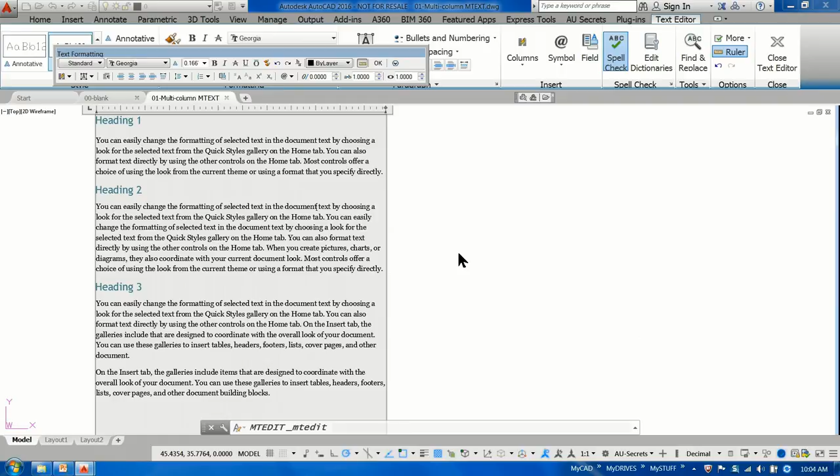So we're going to right-click and go to columns, and we all know we have columns. If you use the dynamic columns and the auto height, I want to go ahead and show you a couple things that you can control. So first of all, if you look at this, double-click, there's a little icon right down here that you can use to separate that. Did I not turn that on?

Columns, dynamic, auto height, there we go. It's not set to 2, obviously. Come on, don't you love it when the first tip doesn't work right? That really is no good. There's another setting, that should have worked.

There we go. Okay. Don't know why it didn't work the first time. But when you go ahead and you move this around, by default you don't have any control initially over what the spacing is between the columns. But how you control that is if you just use the arrow over here to control your paragraph width, that's how you can change what the spacing is between the column. And then when you wrap it, it will maintain the distance that you specified.

All right? So you have to use this little button right here. Everybody tries to always use this one. That doesn't really work for what you want. All right. Not major, but if you've not run into it.

Okay. Text frames. Now this one is actually a new tip in 2016. How many of you are in 2016? Oh, that's impressive. Okay. So in 2016, you have a new frame that you can put around your text. So if I select this piece of text and I go to Properties, you will see that right here you have a text frame option in your Properties now where you can turn it on.

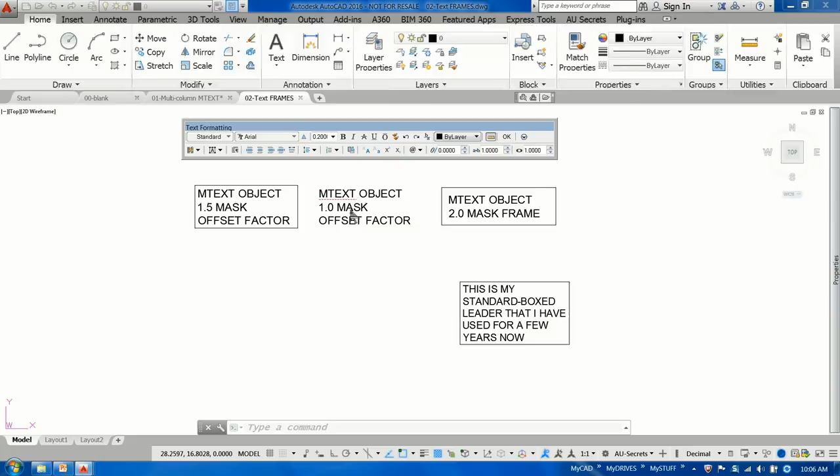And the secret is how do you control the spacing between the text and the frame? Well, if you go ahead and edit this and you right-click and go to Background Mask, even though I'm not using the mask, this is your spacing. So if I change that to a 1, oops, not 10, 1, and then I won't actually use it, I'll turn it off, that still is what it actually uses. So here you can see some of the examples that I did where I've got 1.5 and 2.

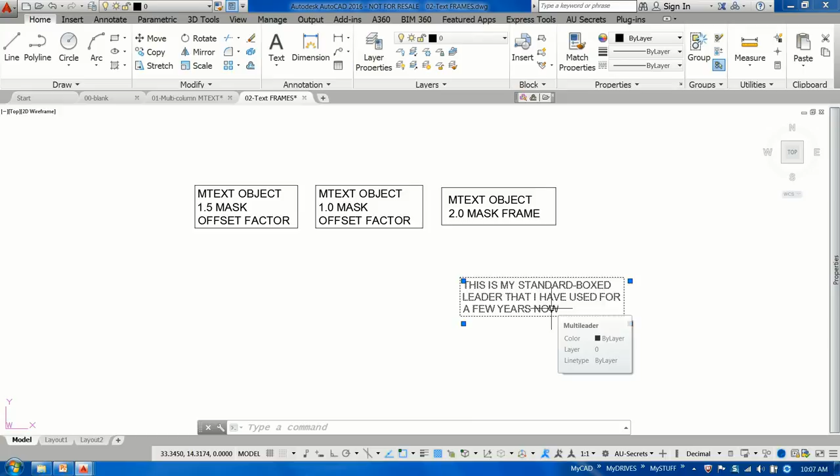Now, if you're not in 2016 and you're in any of the previous versions, I want to show you my tip that I used to use for box text that was dynamic so that when you modify it, it grows and shrinks with you. This is actually a leader. So what you need to do is you need to make a leader type with no leader. That's the trick. You have to figure out how to misuse and abuse AutoCAD, right?

So if you look at this, I'll go ahead and show you what my leader style looks like. You come up here. I have a standard boxed leader. And yes, it should be annotative, by the way. If you come in here, I don't have anything turned on here. There's no leader points. But one of the things that you do need to do is you need to come in and specify your arrowhead size.

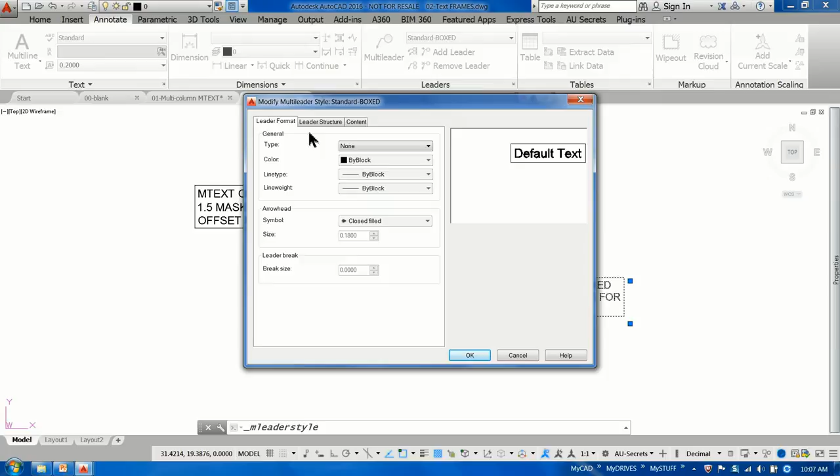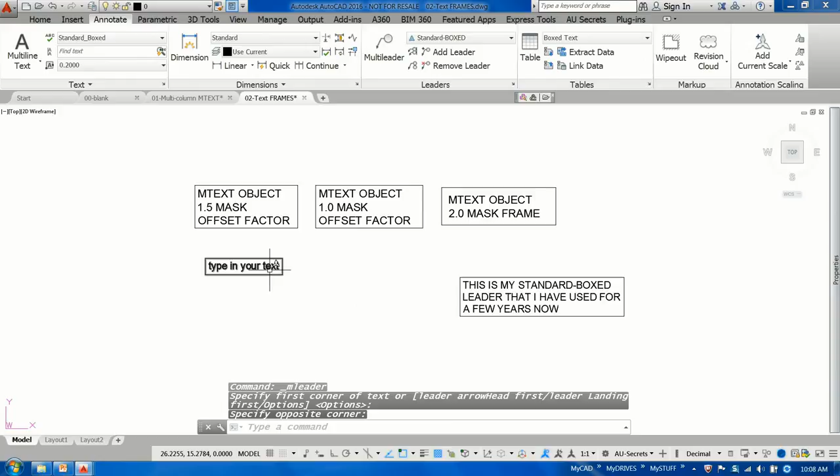And the reason you have to do this, I'll show you in a minute, you also need to be able to specify your landing distance and a couple of those other settings because they control things that you'll do with it later and some of the spacing. And yes, it should be annotative. So then if that's my current text size, when I use my leader command, it actually lets me draw the box with no leader, and you just type in your text, and it automatically has a box around it. And if you want to modify it, it'll adjust accordingly.

Now, the reason I like to have those other settings defined is it can be kind of nice to select it and right-click and add a leader down the road if I need to. So it's nice if those settings are actually defined, if you ever need to. But you don't have to have a leader defined on a leader. Just use the text settings. Okay. And all the instructions on how to do that are all in the handout.

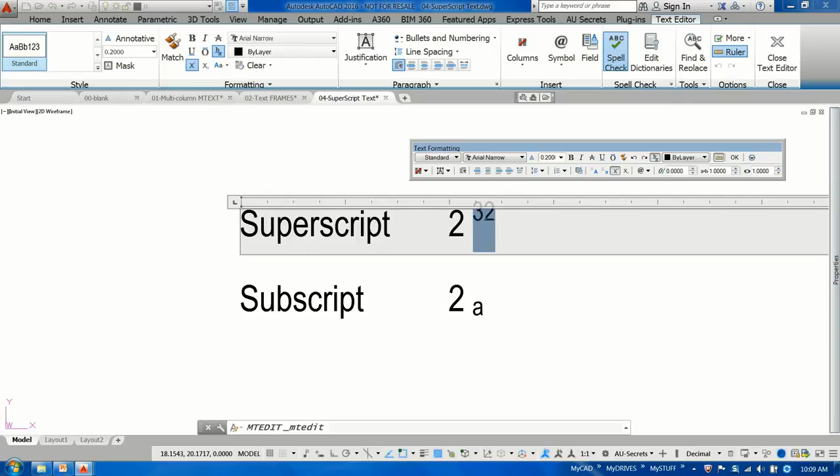Okay, superscript. Everybody knows how to do the typical superscript, right? Because now it's in the mText editor. Is everybody using mText now more than dtext? That didn't sound very good. Okay, because mText is actually pretty functional now. If you double-click on this, everybody I hope knows that you can just highlight this and you can hit superscript or subscript, right? I think that part's obvious.

What's not necessarily obvious is how you can do some of this other subscripting and superscript. So here, this is how, and you could do these for years. This has been there for years. You just had to know the trick. If you take text that looks like this, top/bottom, and you double-click that, and you make that into a fraction, what the slash will do, so I'm going to come up here and I'm going to stack the fraction, is it'll actually give you text in the fraction.

So I used to work with utilities. We had a lot of text that were fractions, not numbers that were fractions. You can also do this one. If you do the same thing and you stack it, it'll give you the diagonal fraction with text. And then these here, if you select this, these are more like the old way of doing the superscript and subscript.

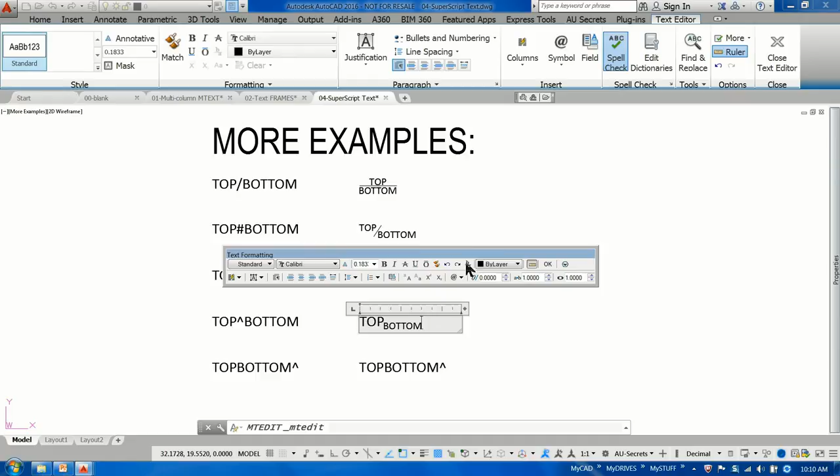That one will allow you to, with the up caret there, just make it a stacked fraction with no line. And then right here, again, I would do this one different. You could highlight just that portion and stack it, and that would give you the subscript. But these two down here are actually easier just to use the buttons that are up here at the top. Make sense? All right, these three here are the ones that most people don't know they can do.

Okay, I haven't hit one yet, huh? You guys all knew all this.

Okay, clearing attributes. Now, I don't usually include a Lisp routine in my secrets, but I loved this one so much that I thought I have to make sure everybody knows about it. In the handout, we'll tell you the website where you can go download it. It's free. Or email me. I'll send it to you because it's free.

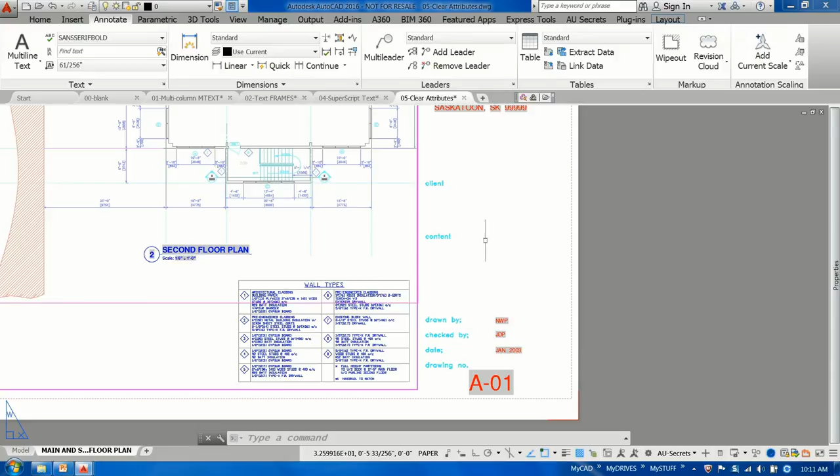Yep, I've been using that one, and I thought, okay, I got to make sure everybody knows about that. I hadn't done this one for a while, and I thought, oh, I got to put that one out there. So that one's free, so download it. That's the only one I have in the secrets that you have to actually go get something to get it to work. But free is always good.

Okay, this one I did repeat from last year because I keep getting requests on how to make this. This is actually a block that has a field that will read the insertion point of the block. So if I go ahead and I add this one, I'll select it and put add selected. You can see what the block looks like by default. If I come over here and I snap to something, and I'll just go enter, enter, enter. Oops, I didn't really want that to be at an angle, but all right, see it picks up the insertion point, and my insertion point is at the little dot on the end of the leader, okay?

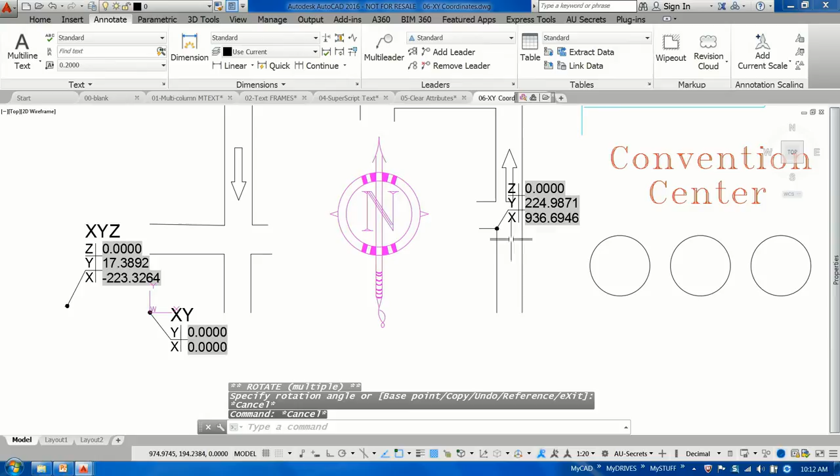If I take this and I move it, or let's just copy it. Oops, I hit the button too quick. Copy, come on, copy. Oh, I went past it, sorry. Better read, huh? Copy. Sometimes you can't click. There we go. Copy.

And you see I made one for XY as well. Now, it doesn't look like it necessarily worked, but if I regen, they'll all update with their insertion points. So I have any civil people out there? It's a great way to label your points that you need to label. All right? Now, how did I make that?

If we edit that block, and we come in here and we look at, let's just look at X. All right, it's a field. It's the insertion point field. And if I select that and I go to edit field, you'll see that I did an object and I selected my object, which was my piece of my field. It's a block placeholder, which means it's going to look at something about the block when the block is inserted. I looked for the position.

I specified how I wanted the units to be displayed. And then I selected that I wanted that one to be the X value. And I did the exact same thing for the X, the Y, and the Z. All right? And then you pick OK, OK, and that's basically what you have in your block. And then this here is just actually a piece of text to label it. So these three right here are the X, Y, and Z fields. All right?

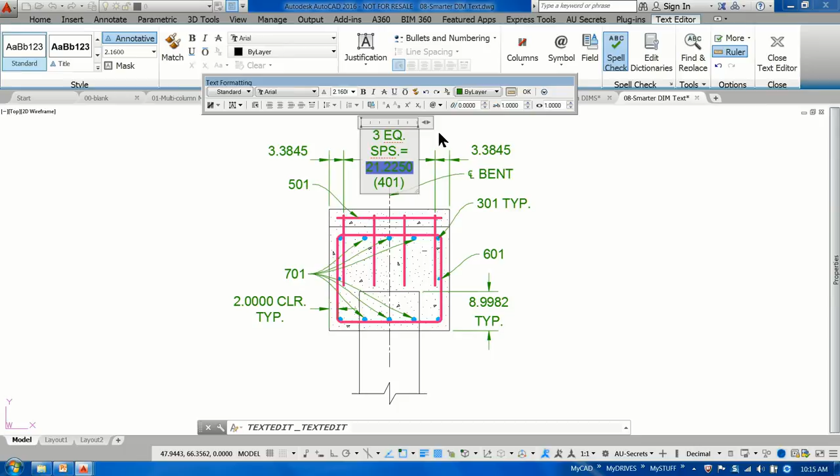Yay! Did you not want that? I've been waiting for this one for a long time. And you can add whatever text you need, right? I thought that was a huge improvement.

Okay, there's a new dimension command. I don't know if you're in 2016, you've already found it, you've already been using it, and it's your favorite, right? How many of you still type in dim from the old days to get the old dimension command? Well, that one's gone now, and now you're going to get this one, all right? So the key in for this is dim. So they're going to force you into the new world, all right?

But the new dimension command actually looks at what you hover on. So if I hover on a circle, it's going to give me a diameter. If I hover on a line, it will give me linear. So a parallel line will give me, if I can get that to hover, I didn't mean to catch that. See, there's that one. I get an aligned if it's an angled line. If it's a straight line, you're going to get the straight line. And whichever one you pick, when you finally select it, that's where you drag your dimension out. All right? Now, there's a couple of other really neat things that you can do with this.

If you're using this new command, and let's say I want to split this 2.0 dimension into 2. If I hover here and I select this, when I come up here and I select on this dimension, come on. Oh, I must have fat fingered it. Come on, find it. Why aren't you giving me the break? Yeah, but I don't want to use it. Oh, you know why? Because I don't have my dynamic input turned on. Who uses dynamic input? Yeah. This one is easier to see if you use this.

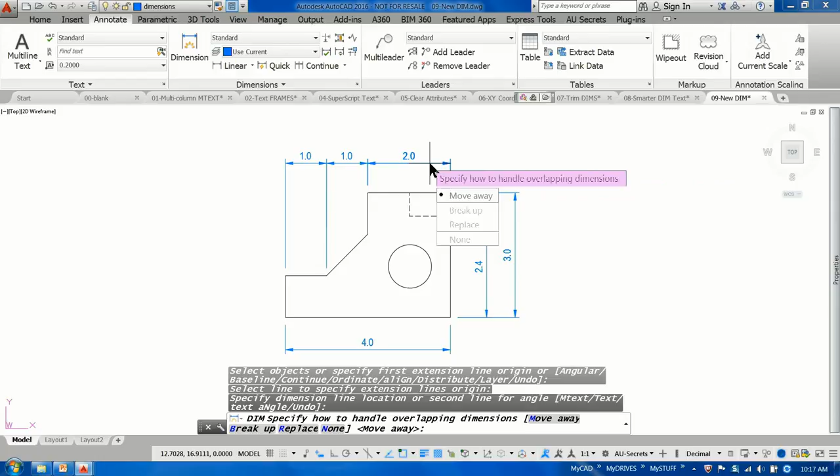So I select it and I come up, and now I select this, and there's a new break up option. If I do the break up and I select this dimension, it'll actually break this dimension. It's supposed to break up, there we go. And it'll break it into 2. Isn't that a great option? So now you don't have to trim and then dimension, right? So that saved me a couple steps.

And if you're doing the dimension command and you're on a circle and you select that, you'll see you have an option to change to radius right at that point. So you don't really have to even have those other commands. So now the only command you really need to use is dim, unless you're dimensioning between things.

Yes? Okay, so I've got a property line that's an arc, and all I wanted to do is dimension the overall property. I'm just getting used to this. Is there a way, I mean, it's selecting an arc, right? Because that's what it is, but I don't want it to be an angle or an arc or anything like that. I just want a straight dimension. You want the length of the arc. I want the length from this point to this point, but that line happens to be an arc. Right. Send me an email.

The question was, how do you dimension the length of an arc? And in AutoCAD, it's not a simple process, right? Any other civil people out there? So I would be happy to show you the steps you have to go through to do that, but I have to set up a specific dimension style in order to do that. So send me an email after the fact, and if anybody else wants that too, I can send you the step-by-steps, show you what you need to set up, because you have to set up a specific style to get that to work. Okay? Okay.

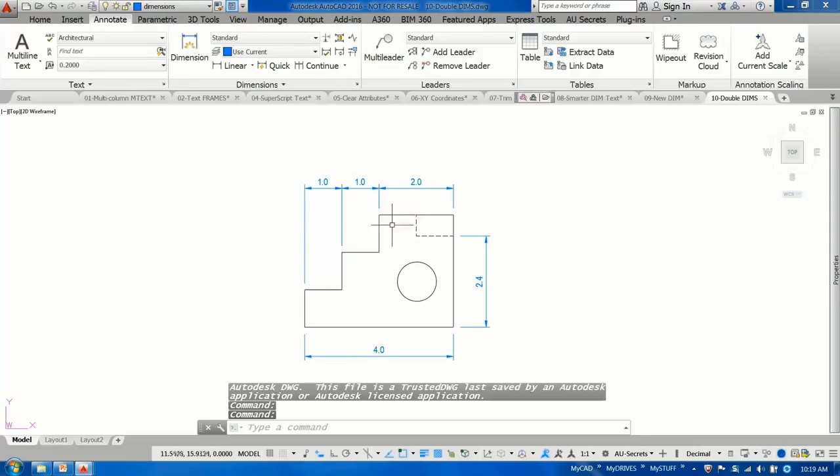All right. This is another oldie, but I want to make sure everybody knows about it. You edit your text, and you want this to be a typical dimension, right? And you don't want it to stay up on that line. You want it to go down below. Am I in the right file here? Let's see.

Yes, I am. Okay. Because I have a style in here that I want to use. How do I get TYP to go below the line? Because if I hit enter, it does that, right? Somebody knew it. What do? Backslash capital X. Right? And that will actually send it below the line.

Now, if you do this a lot, well, I'm not saying you should do this a lot, but what if you have a not to scale dimension because you're in a hurry, right? But then you always go back and fix it? Yeah, right. I know you don't.

If I have a dimension that I want to do this on, what I do is I create a style so the users can do this easily. You select the dimension, right-click, and if you go to Style, you can have a typical dimension or a not-to-scale dimension. And it'll automatically put it on there for you. All right? So it's important that you make life easier because otherwise your users don't do what they're supposed to do, right?

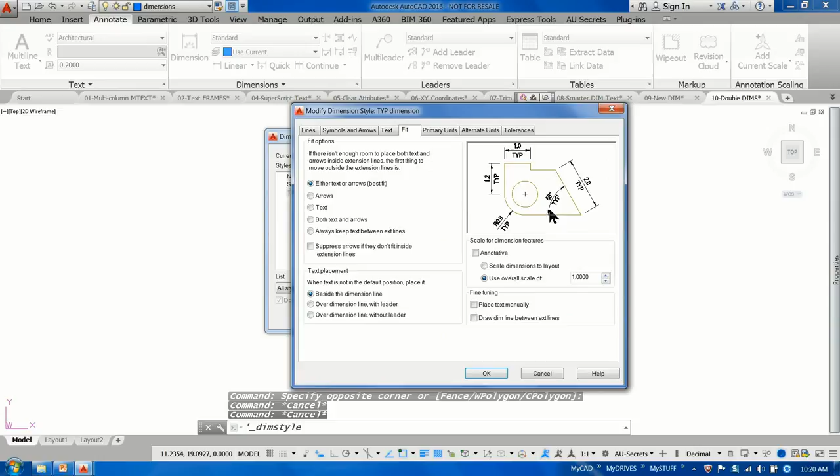So how I did that is if you look at the dimension styles for typical, all I did was underneath of, there it is, as a suffix or a prefix, whichever one you want it to use, I put the \X with the TYP. And then that will force that to be below any true number that is in my dimension. All right?

Now, if you edit your dimension so that it's no longer true, first of all, I'll slap your hand, right? Now, how do you restore it? Excellent. You come in here, highlight that number, and you do less than and greater than. Now, I've had trouble with this before.

I end up now in 16, I have to come over here and do it in my override right here. I'm going to have to report that one because I don't like that, right? I don't like having to do it from properties. Something about the MText editor is not letting me put that back in. Okay. We already talked about split dimensions.

Okay, quick edit MLeaders. Everybody knows that if you select a multileader, you can remove the leader, right? All right, that's a given. I'm assuming that's not a secret. Now, the secret is, how can I quickly come in and just delete one line without using remove leader? Because this way is quicker. Who was in my Jeopardy class? What's your favorite key in AutoCAD?

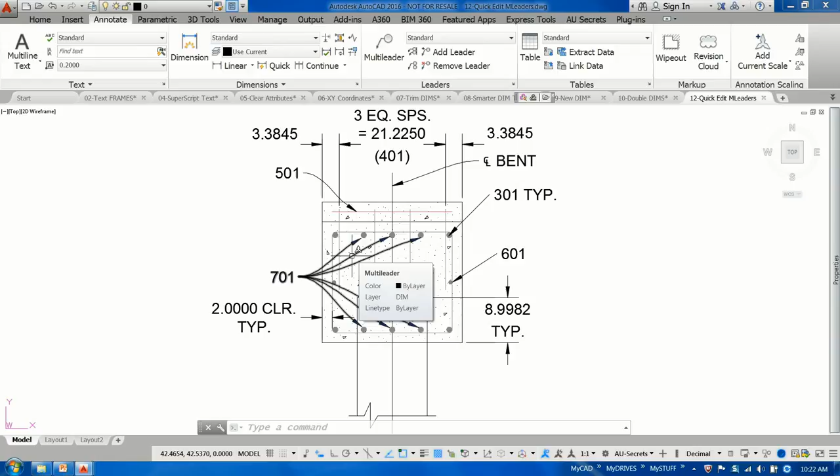Control. So did you know that if you hold the control key down and you select the leader line, you can just hit delete? Isn't that nice? And another thing you can do, once you find that out, you start trying things out. Well, what if I zoom in here and I use the control key and I pick just the arrowhead? What could I do with that?

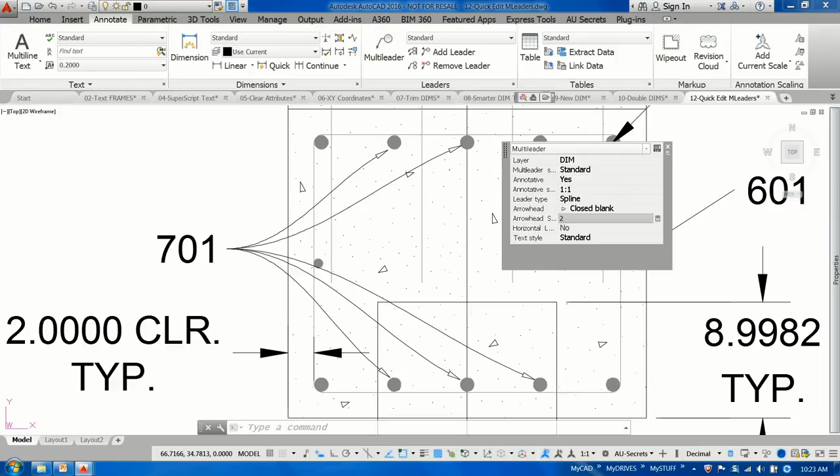So if I want to change the arrowhead, I'm going to turn on quick properties. And let's change it to open, closed blank. They're all changing. I can change the size. Oops. Isn't that cool? No? I thought it was cool. So I'm sorry. Okay, maybe I'm weird, but I thought that was cool.

You can also come in, select the line, and using quick properties, you can change it from one type to another. None. And now that does not look like a spline. So I'm not sure what's happening with that spline, but I may have to modify this a little bit. That is not a spline. Let's try this one. I'll do it over here. There we go. Now let's change that to a spline. There. That's how it's supposed to work. I'm not sure why that one's not working.

All right? So you can change any part of the multileader. So now you can have a multileader with some straight lines and some spline lines. Because you can't define it that way as a style, can you? Nope. All right.

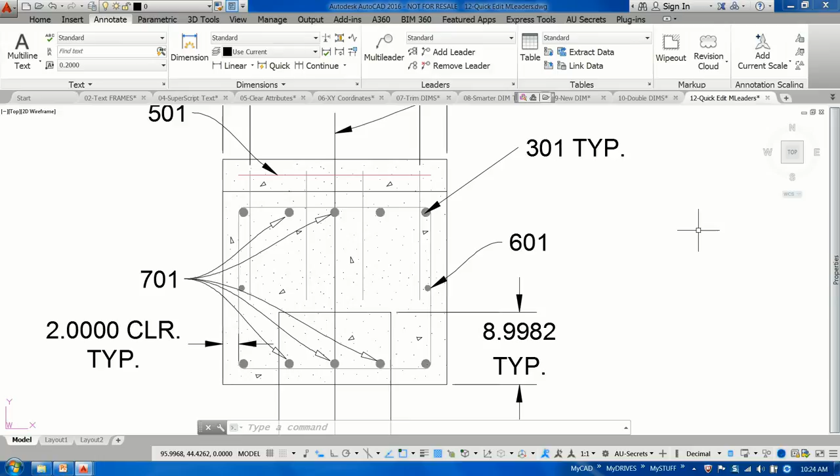Okay, the forgotten dimension command. Everybody knows that if you do DIMALIGNED, and I would snap here and here, I'm going to get a crooked dimension. Because DIMALIGNED aligns to your snap points. That's not what I want to do. So there is a key-in only command called DIMROTATED. The only way you can find it is if you key it in.

So if I type in DIMROTATED, all right, specify the angle of the dimension line. Let's just angle it with that. Now if I snap to those points, it stays parallel.

Now you're a good draftsman, right? Well, we got these rules that you still have to follow. Some of you are old enough to have done drafting by hand, right? Remember those old days when we used those archaic things like pencils and pens? All right. I had a student once go, draw by hand? What do you mean draw by hand?

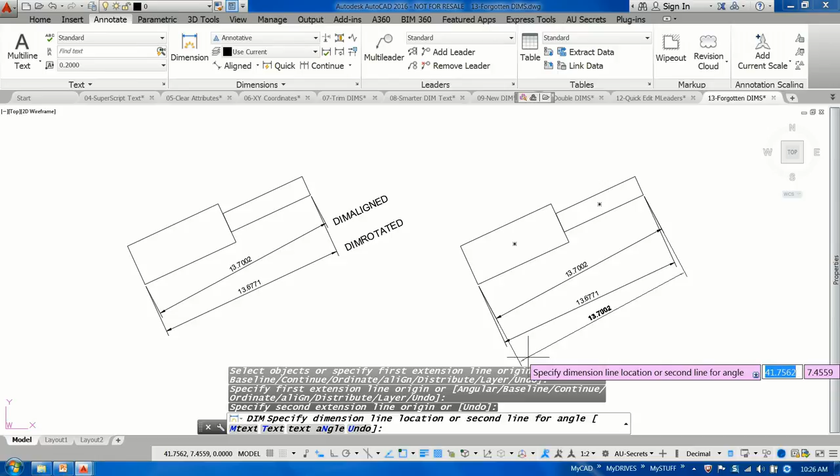The new one? This one? All right. You get a prize if this works, because that's a tip I didn't know. So you go from here to here. Oh, see the angle you mean? Keep going to where? I'm trying. That's okay. You almost got a prize.

That would be cool if I could hover here, though, and it would align, right? Now, I did notice there is an angle, but that's a text angle, so I don't think I can do that. But that's a good idea. Go to the AUGI website and do a wish list, because I think that's a great idea.

I'll give you a small prize if you come up. All right. Yes, anybody who gives me tips that I don't know, because I can't find all these. You guys have to help me.

Okay. Now, I already did number 14. How would you reset all of your dimensions to be true? If somebody's overwritten them, you do the less than greater than, right? So how would you do that globally? Just select all your dimensions and use properties, right? Okay.

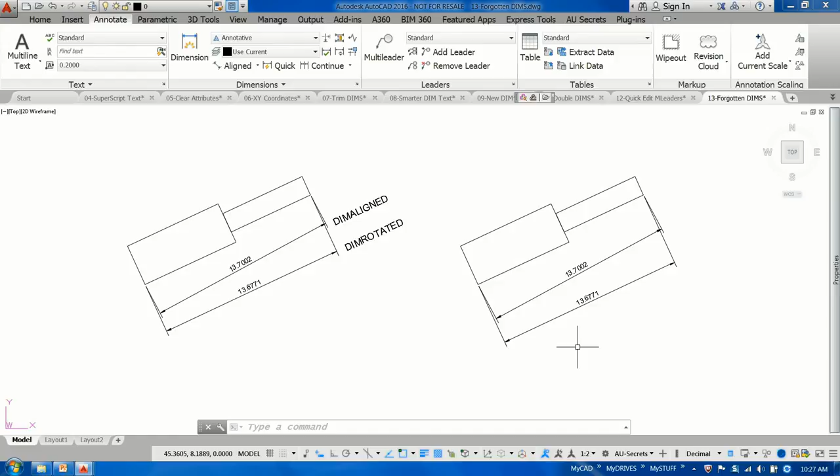Okay. Here I just have my regular dimensions from a drawing that I did years and years ago. How many of you are using parametric? Really? None of you? All right, there's one. Yay! Star pupils. Okay. If you've got an old drawing and you want to now make it parametric, but it's already got the dimensions on it, there is a button right here that allows you to convert the old dimensions to a parametric dimension.

Now, it doesn't initially look like it's going to do what you want because it does that, all right? The reason it does that is because D1 is the parameter name, right? If you look at this variable right here, constraint name format, what you need to do is change this variable so that it doesn't give you the expression, but it gives you the value, all right? So if I come in here, and I select this, and I go to Properties.

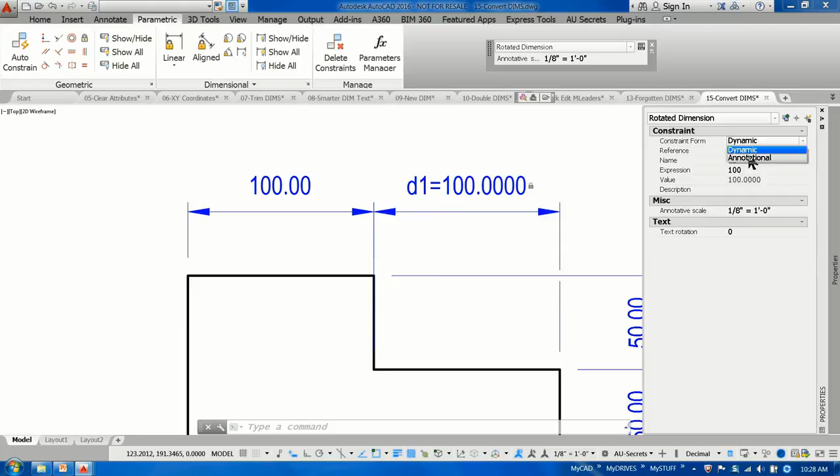It's annotational, all right? It does have to be annotational as well, just so you know, but I think they all come up that way now by default. Prior to 2015, 2016, I used to always have to come in here and change this to annotational, because it would turn into like a grayish. It'll look like this initially. So be sure you come in here and change this to annotational. And then, if you type in that constraint name format, and I change it to a 1, then it'll actually look like a real dimension when it prints, but it's still parametric. All right?

All right, this one there's a couple answers for. Depends on what version you're in. How do I get my dimensions to size themselves in my viewports? What's the best answer? Annotation scale, right? How many of you are using annotation scale? That's getting better. It's getting better. Most people are still not liking it, but it's a learning curve.

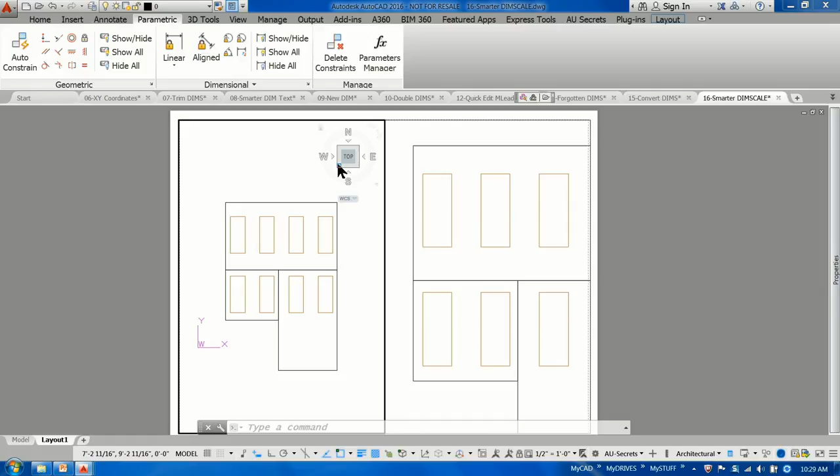Try again. If you don't use annotational dimensions, then what you want to do is set your dim scale to 0. If you set your dim scale to 0 and you dimension in your viewport, AutoCAD will automatically size your dimensions anyway. Okay? Trust me, it works.

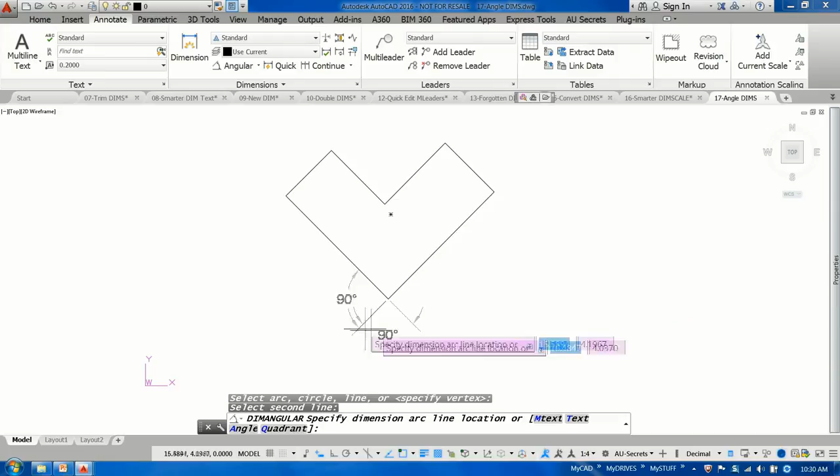Okay. I keep getting this question, so I added it. Sometimes, you think people know things, and you find out that they don't. Here, I want to do an angular dimension. And if I select my 2 lines, I get everything less than 180, right? How do you get more than 180? I get this question at least 2 or 3 times a year.

You run the command differently, all right? If you look, it asks you, you can hit enter to specify the vertex. You know, read that thing called your command line, right? If I hit enter, I can now specify the vertex here, and I can go to here and here, and I can get any angle that I want. See, it's hidden. People don't even know that. So good. There were a few of you that hadn't discovered that.

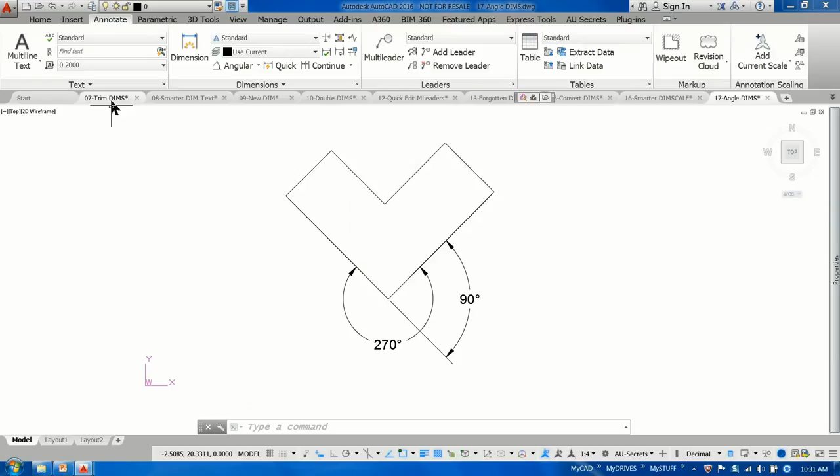All right. Oops, not Control P. You know what? I better close some of these, so I'm going to right-click. Here's another good one. I'll do right-click up here. Close all other drawings, and we'll just say no. I wish there was a close all and don't make me say no. There we go. All right. Not that it would crash on me, but.

Okay, I have a polyline. How do I get rid of that middle segment without exploding?

All right, if I hold the Control key down, our favorite key in AutoCAD, and select this, it selects it as a subobject. This command was initially intended for 3D, so you could select subobjects in 3D, but nobody said it wouldn't work in 2D. So if you select this, and let me turn off my quick properties here, and you just hit the delete key.

How many of you would still be exploding, right? And here's the cool part: these stay as polylines. It's even better. Explode is not the answer for everything. It should not be your first solution. It doesn't work, explode it, right?

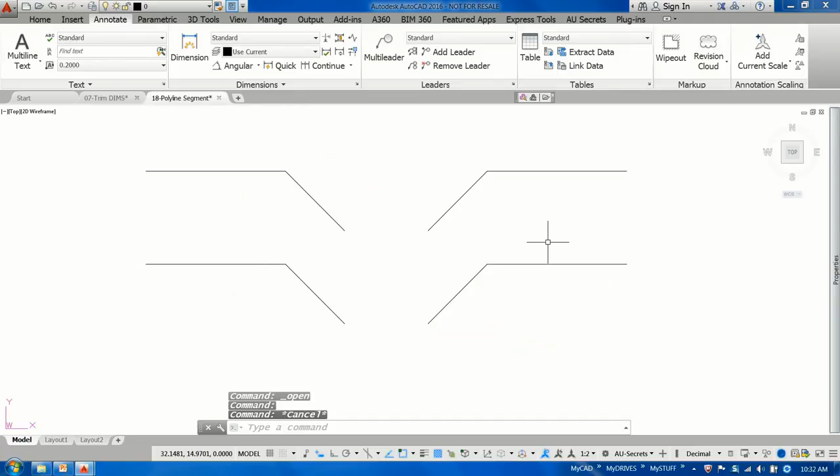You could select multiple. Yeah, they're two separate ones. If I Control-Delete, this is a polyline and that's a polyline. They're not connected, but they stayed as polylines, whereas had you exploded it, they would all be lines, because then you'd have exploded it to individual lines and deleted one of the lines.

All right, the offset command. I'll confess, the reason I looked for this one and figured it out, and was so happy when they finally did it, was because I also teach MicroStation. This was one of our missing commands in AutoCAD that we needed for a long time.

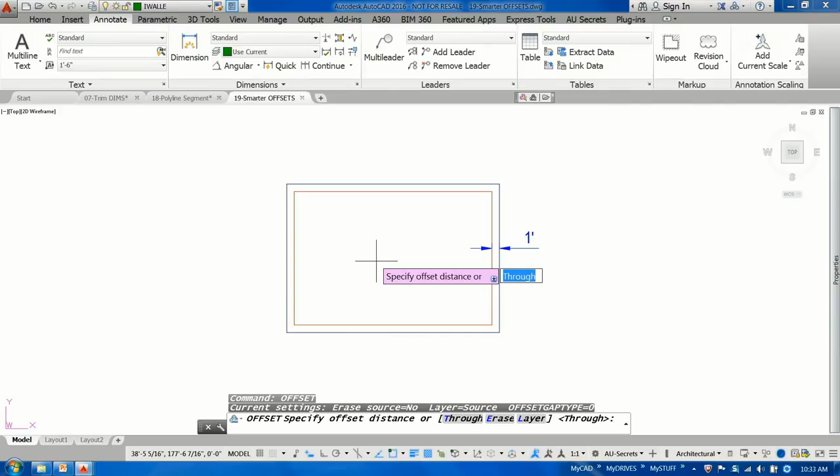In the offset command, you can go through a point. You have a layer option. So I'm going to go ahead and set my distance to 12 inches. And then, actually, let me change the layer first. L for layer—I have the choice of current or source. My current layer is green and dashed. Source means it's going to take the original element I pick and let me offset that. So there's two options buried in the middle of the command that a lot of people don't discover.

And it's hard to do manually. I'm going to show you how to put it on a button—in the handout I show you how. But if I do offset, hit enter, and select my line, here's multiple—you've got to remember to pick M. All right, we're going to do enter for 12, select my first line, and then do M for multiple.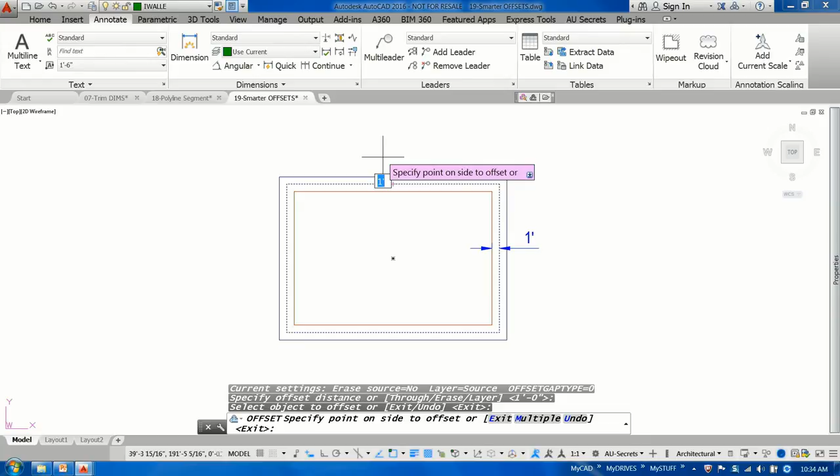Why is my M not showing up? There it is. Now I can continue to do multiple offsets just by clicking whichever direction you want to go. It's easy to lose that when you're working through the command because you're not reading your command line. The other option is to offset to current.

So if we do offset—sorry, I'm a keyboard person, I'll assume you know where the offset command is—I'll still do the 12, but I want the layer changed to be current. So now when I select this, it goes to my current layer. I used to do utilities—believe me, every utility line in your neighborhood runs along the property line, but I don't want it on the same layer, and I don't want it the same color.

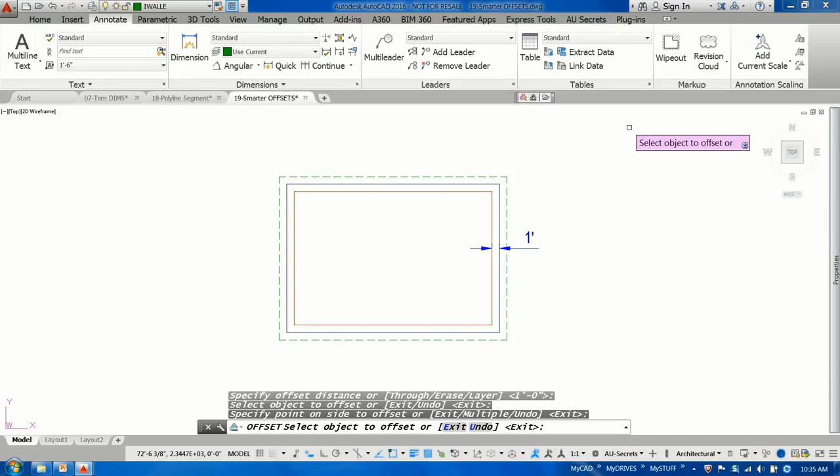Yay, okay, maybe it was just me. But that was because I used to always have to offset, and then I'd have to move it to where I wanted it. Now, if you put this on a button, it's much easier.

So I have a couple buttons here: offset current, offset multiple. I show you in the handout what to put on the button. So now if I go ahead and do offset multiple, it just does it—I'll do the same distance, pick my line, and remember, I'm still set to layer as current. You can also have one that does layer to current or layer to multiple, offset multiple. You might also want one that says offset source, depending on how you use this.

Is anybody in pre-2009? I hope not. Otherwise, my tip would be: upgrade.

But just in case you are, I also put the old way, because you had to change how you did those buttons along the way, so I still put the old key-ins for the buttons if anybody happens to be in that old version. All right, so now we've got on-the-fly base points.

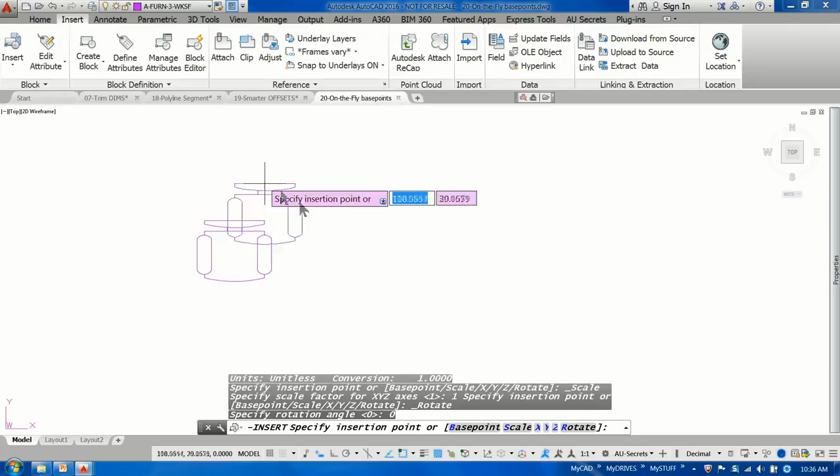All right, if I select this, I'm actually going to go to Insert so I can show it to you first. So I'm going to insert my block - a real complex drawing here, right? When I bring in my drawing and I want to change the insertion point on the fly, this is a dynamic block, and I'll show you how I did this.

If I hit the Control key, I have alternative insertion points in my block that I can use, so I can place it any way that I want. Now, there's a bug in 2016 and 2015 where if you select the block, right-click, and do Add Selected - which is how I place most of my blocks anymore, I just pick the block that's already there, right-click, Add Selected, and start inserting more - it doesn't work.

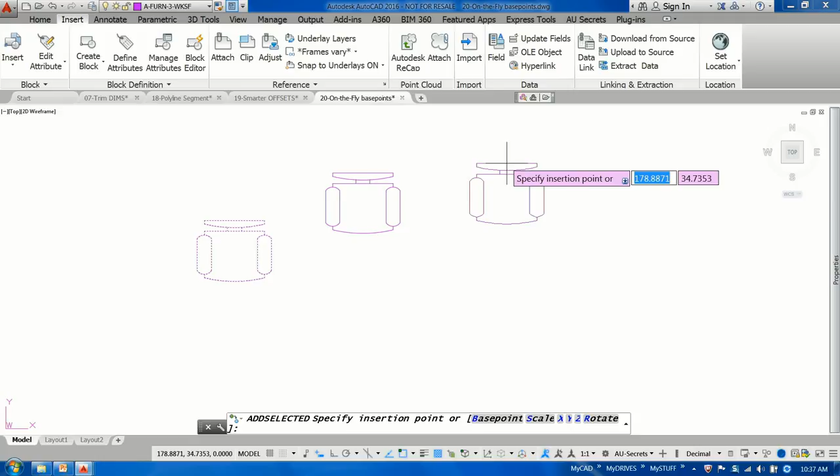I've logged it. Please go and vote for it to get fixed, right? So you do have to be in the Insert command in order for that to work, not the Add Selected command.

Now, how I did that was in the block itself, you have to define point parameters. You don't have to do any actions. All you have to do is put a point parameter where you want your alternative insertion points to be, and then every time you hit the Control key, it cycles between them. So you're just sitting there going Control, Control, Control, Control until you get to the insertion point that you want, and you place it.

Does that work if you have actions on them? It should work if you have actions on them too, yes. The question was, does it work if you have an action assigned to the point? Yes, it will. But be careful when you're inserting, because if your origin point and your point parameter are in the same place, I've had that cause a problem.

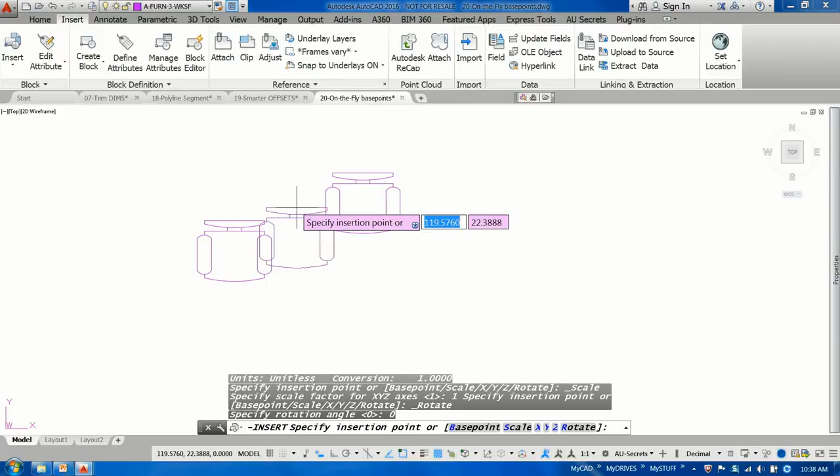Now, another option is this. If you have a once-off insertion point that you need, how do you do that? How do you define your base point on the fly?

Look at your command line. You have a base point option. If you just type in B and say, I need it to be offset from here like just a little bit, that is now your insertion point before you place it. So you're in the Insert command and you change it on the fly, right? Just a one-off. If you're afraid of dynamic blocks, they're not hard - start simple.

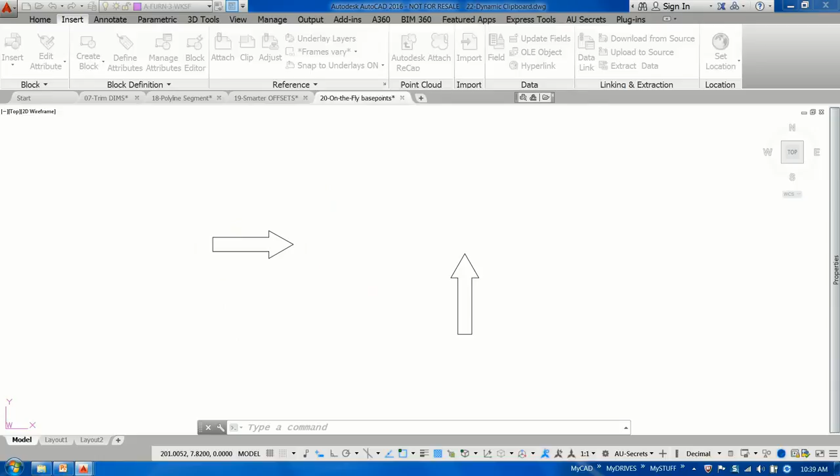This is one that I learned this year, and you won't believe how long we've been able to do this. I was so disappointed. Okay, I've got this arrow here. I'm going to copy it to the clipboard, right, so that when you paste it, it's exactly what I had when I copied it to the clipboard. Now, first of all, I would change one thing.

Select your objects, and then do Control-Shift-C. What does that give me? I can specify the base point that I want to pick it up from. So I'm going to pick it up from here - that's not the tip yet, all right? So that now when I paste it, that's how I have a hold of it. So first of all, instead of doing Control-C, do Control-Shift-C, all right?

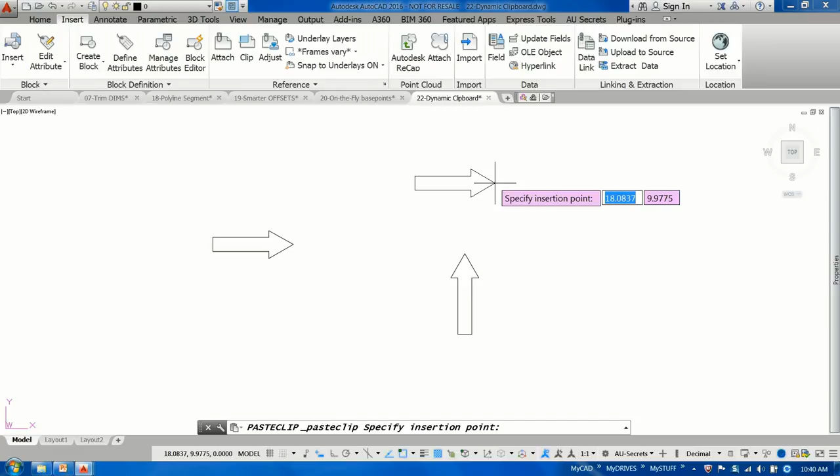Now, the tip that I learned is undocumented - my command line is lying to me. There's more stuff I can do than this, all right? If I just type in R90, I can paste my clipboard at any angle I want.

It works as far back as I could go. Yes, it works in 3D. The question is, does it work in 3D? Yes, it does work in 3D. Isn't that awesome? So just R and give it an angle.

I didn't try scale. I don't think... actually I think I did try it. It works.

See, your command line, you get a prize - your command line is lying to you. There's more there than they're telling you. That was one of the ones I learned this year, and I was like, please don't tell me I could have done that all these years. Because how many times have you pasted and rotated? A lot.

Okay, quicker join - there's a couple different ways you can do this. I've got all these lines - they're either overlapped or separated, right? I did the separated because you can see that better, but they could also overlap. We've all run into the drawing... let's see, do I not have it in this?

That has those dash, dash, dash, dash, dash, dash, dash - somebody, a poor CAD operator who didn't do this right. I don't have this file in here, but you've got overlapping segments, or segments that are connected together, and it's like 500 objects rather than one. All right, well the new way to do it is to say Join, right? If you pick Join and you select everything, it'll join them all together. It should have - maybe I have that too big.

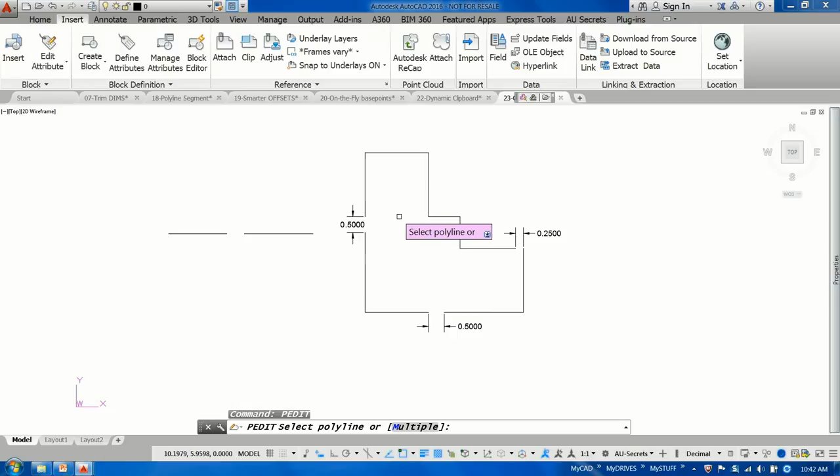P-edit, right? You would select, I'm just going to say M for multiple and select everything. Oops, missed one. All right? Now what you want to do is there's a fuzz factor. If you pick join, here's your fuzz factor. That's why I gave you the dimensions.

My fuzz factor has to be bigger than 0.5. If I made it 0.3, it would only close the one gap. If I do 0.6...

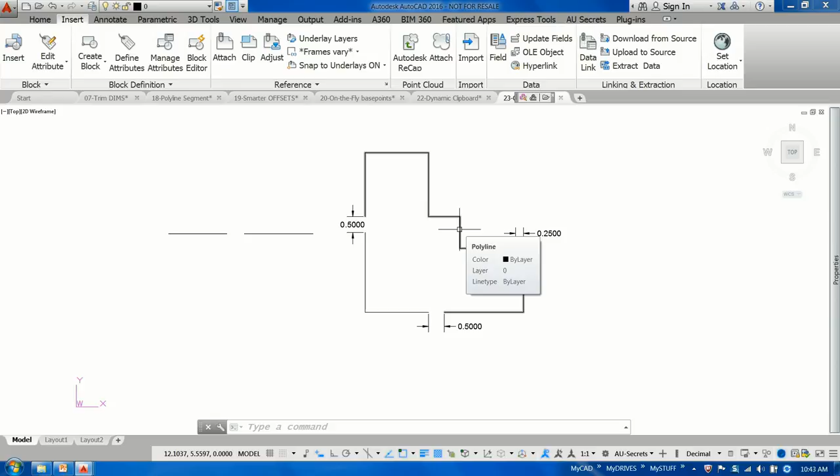And then I say join, and we'll go ahead and hit enter, and it closed. Oh, why didn't it close that one? It's only 0.5, but it will actually come in and close all of those into a single polyline, because the old p-edit join will still go around corners. The reason my other two didn't is because I probably fat-fingered it in the wrong order on the command line.

Rotating the world. I only put this one in here because of 2016. Hopefully everybody knows you have a UCS and can rotate your world as you're working. So whether you're in 2D or 3D, you can come in and rotate by selecting an object. The problem is they turned off this panel by default.

So secret number one, when you first get into a new version of AutoCAD, go check your ribbon out and look for stuff they turned off by default, because I think they assume you don't use it. If you right-click, show panels, it's not called UCS, it's called coordinates. So there's all your commands that you can't find in the ribbon.

And then, of course, you've got this one here, where you can do rotate by object. You just select the object, and it rotates your cursor to match that object. So now when you're drawing your lines, you don't have to have all those different polar angles defined, because all it really did was rotate my cursor.

Now, I didn't know this until I was a trainer, and I would be teaching this command. We would run this command, and the first thing everybody would do, almost in unison, the whole room would just go, gunk. And then we start looking at their screen like this.

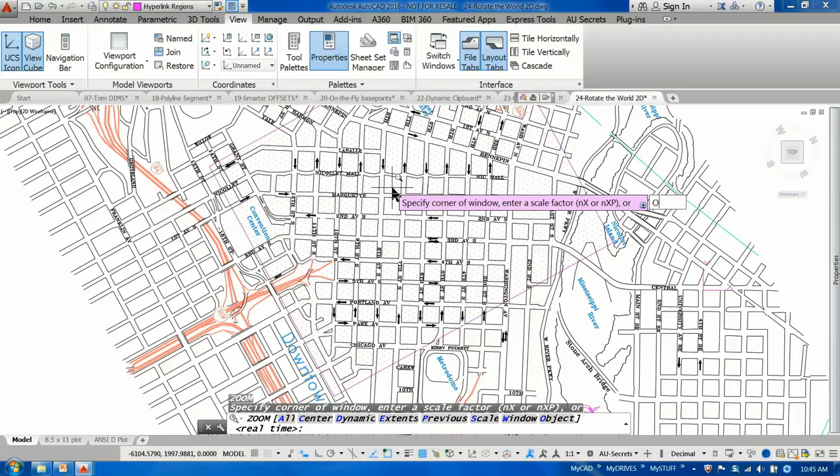I'll do a zoom to objects and just select some stuff, so it zooms to the object. Then, when I come in, since I did this zoom factor right before, now if I pick a line, now it works. Yay, for once it works when I'm demonstrating.

So if you don't like that UCS follow going all the way out to zoom extents, what it really looks for is your previous zoom. So if you built a button that did a zoom objects and you selected your area of view first, and then ran this UCS object, it won't go all the way out in your drawing and come back in. It will just rotate what you're looking at in your view.

Because you know when you do a zoom, you have an option in here to specify objects. So just select whatever you want to select. You have to be careful, you might have some long ones that go all the way out, but it will control your zoom factor. Then run the UCS follow, and it does what you want.

Because that's the question everybody always asks: how do you keep UCS follow from zooming extents? All right.

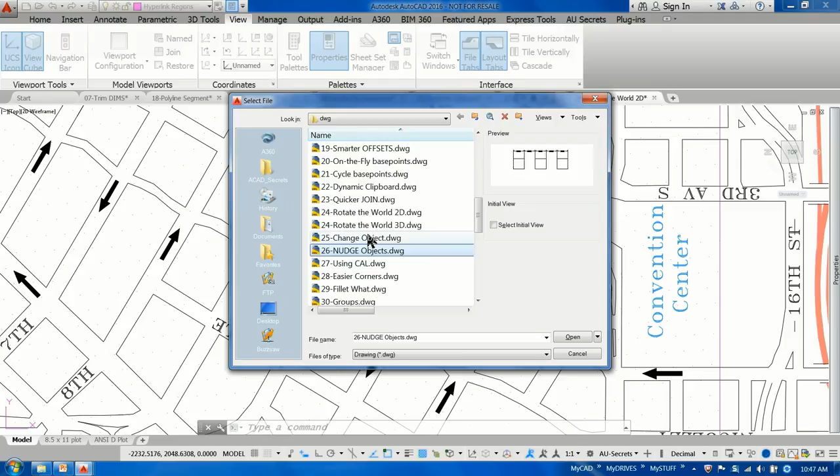I'll do this one. It's kind of an oldie one. There's still an old command called change. Change used to be what we would do for properties back in the old days. Anybody old enough in here to remember change? A couple of you? All right.

Say I exaggerated these, but say you have a bunch of lines in your drawing that are supposed to be orthogonal, but they're not. Yes, you could go to each one of them in properties and change the angle to 0 or to 90, but this is actually easier, I think. So if I do a change, and I'm on polar by default, I'll show you what it'll do, because I'm usually in polar, not ortho. I'll select my objects. When you pick a point, they'll all go to that point.

All right? But if you're in ortho here, and you do change, and select them all, select this, it will make them all orthogonal. That's better, that's easier than properties.

Okay, nudge objects. Everyone know about the nudge command? Anybody not know about the nudge command? This is so fun because this is what we used to tell you not to do, draw by eyeballing it. But we're going to eyeball it by distances. So the nudge command is pretty cool, but you got to know how to control it.

So you hold down the control key on your keyboard. There's no command. You just hold down the control key on your keyboard and you hit your arrows. And it nudges. All right? Now that's great, except, go back to where we were. Okay, sometimes I get too carried away with my keyboard.

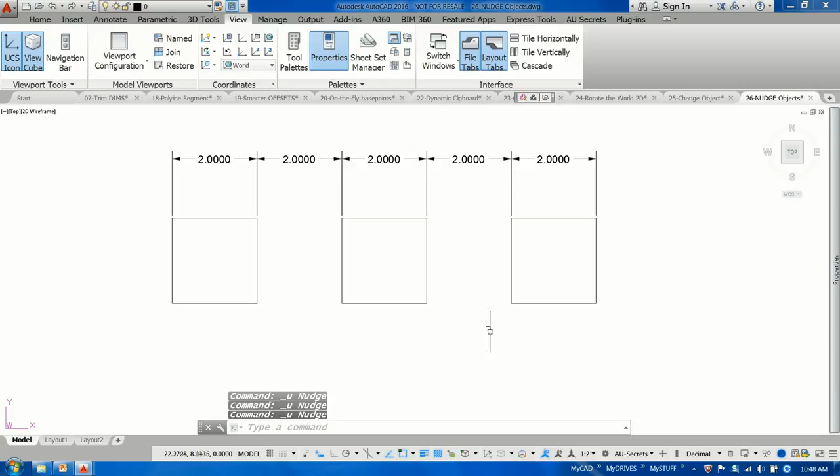How do you control the distance? How you control the distance is with your snap. In your snap settings, if you turn on snap temporarily, so you could make a nudge button, whatever your X and Y spacing is what it uses to nudge. All right? It'll control your nudge.

So now, because snap is on, if I hold control and hit my right arrow key, it's nudging by 0.5. And if I control up, it goes by 0.5. Cool? So now nudge is useful. Well, okay, I thought it was.

All right, the cal command. If you're using a current version of AutoCAD, which most of you are, hopefully everybody knows about the mid between 2 points. Yes? One of your favorites, right? Okay. But what this really does is the same thing as our old cal command did. This one goes between 2 points, but how do I do something like every third point or every fifth point, or maybe I want to divide something into 3?

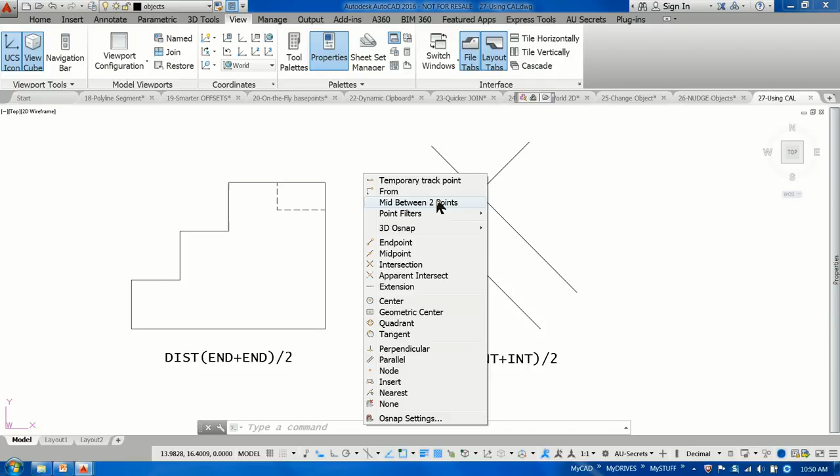Yes, I can run the divide command, and I can get my nodes, and then I can use the nodes, and then I can draw what I need and delete the nodes, and I'm done, right? Well, what you can also do is change this so that this says divide something by 3. And if you put this on a button, then you can avoid the divide command. So let's say that I want to divide the top of this line right here into 3 equal pieces.

So what I'm going to do is draw the line. I have no snappable point here. So I'm going to do the tick, because I want to run a transparent command, cal, enter. Now I want to do my distance from end, spell right, to end, divided by 3. All right?

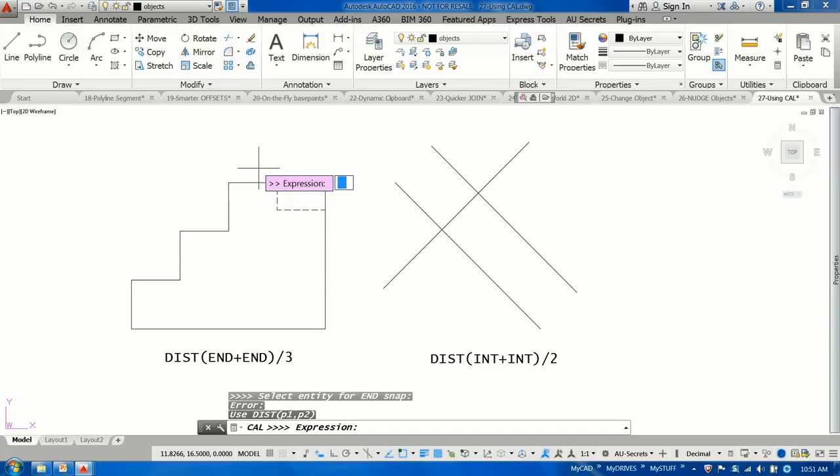I'm sorry, that aperture box is big, but it's because it's like an old command. From here to here, and then if I go ahead, come on, do it. Oh, I'm not sure what that did. It shouldn't have a blank there. Oh, you know why. Because I typed it wrong. Distance end comma end. See, I did type it right. I just ignored myself when I was typing it.

From here to here, and then I should be able to just pick. It's not letting me pick, though.

I did again? All right. Well, you could type it in, but it's end, comma, end. And it lets you divide that by 3, or divide it by 2, or divide it by whatever, all right? Now, if it's just by 2, I'm going to be honest, you should be using this one.

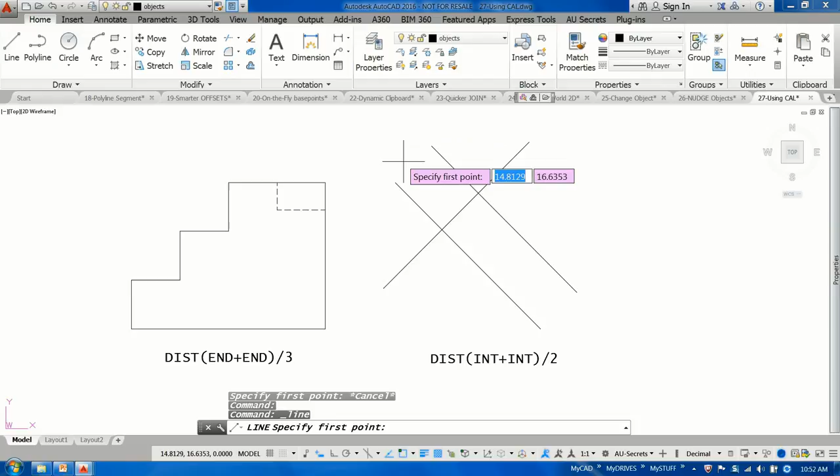So if you want the center line here, you should be using midpoint between 2 points to find that center, right? Everyone knows that one? Hopefully. And you can do any snap that you have running, all right? Or you can even get an on-the-fly one, if you want an on-the-fly one. Okay.

Did you know... I'm going to type in the fillet command, and I'm going to go ahead and change my radius to 2. Did you know you can fillet between circles? I didn't know you could do that either. This one I learned a couple years ago, and I was like, do you know how many tangents I've been drawing? Right? The tangent radius thing, fillet is so much easier.

All right, how about filleting parallel lines? What will that do? You just pick them and it fillets between them, right? You don't even have to give it the radius, because where is it getting the radius? From the elements you're selecting, the two straight lines that you're selecting, it's getting it from there. So those are some of the hidden things in the fillet command.

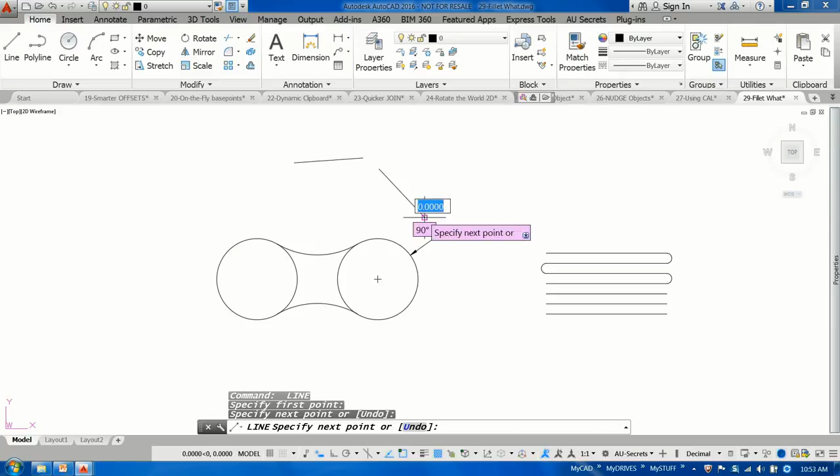And then what's the last one? If you have 2 lines that you want to make a corner and you run fillet, how do you guarantee that the radius is 0? Use the Shift key, and it overrides your current radius setting and always gives you a 0. So you should never, ever have to set your radius to 0 ever again, because that's the one you use the most anyway.

Okay, groups. Again, I confess, I used groups a lot when I was a MicroStation user, so of course I missed using groups when I was in AutoCAD. So now in AutoCAD, they have really, really good groups. And they actually have put a panel up here now for you as well. So is everybody using groups? Groups are like temporary blocks, all right? That you can kind of make them a block and not a block on the fly.

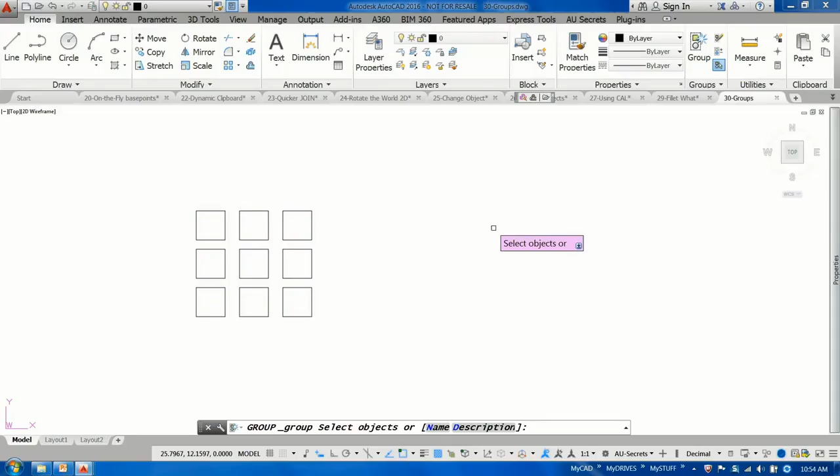So let's say, for example, I want to take this group, and I'm going to go ahead and name it so I can show it to you in the Group Manager dialog, and I'll go ahead and call it Keypad. Then I'm going to select all of these. Those are now a group. If you look up here and you go to your Group Manager, you'll see that you have Keypad in the list. All right, so it's a valid group. You can come in and you can add objects, select, remove objects, different things here.

So now when I select this, it's a group. It's basically like an unnamed block, all right? If you look at it over here, it'll actually tell you that it's a group now. In the older versions, it would tell you that it was some bogus looking, really weird block name.

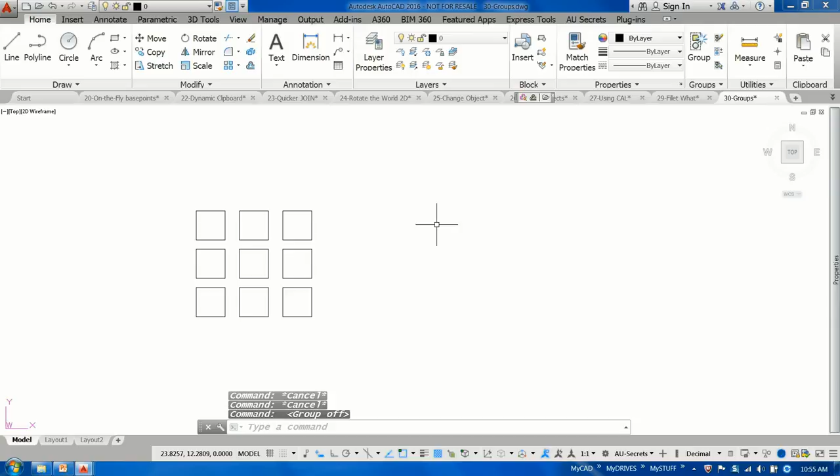All right? So now, if I want to move something, there's a hotkey, Control-Shift-A, that says, okay, don't recognize groups anymore. So now if I take this and I move this, I can move these three. We'll just move them up here. All right? Nothing's a group anymore. Control-Shift-A, group on. I want you to recognize groups in my file now. And now this is a group again.

So who here does furniture layouts? Right? We used to do our cubicles in groups. Because I guarantee you, if you're laying out an office, you're going to hit a column. Right? The columns are never spaced the way you need them. All right? Those structural guys just want the building to stand up. Right? They're not thinking about that end of the road stuff.

So if you make your furniture arrangements a group, it's pretty easy to place those and then just move something on the fly, but then still be able to move it all as one. Right? Okay. And I'm sure if you do some other discipline, you've got some use for that too. I can just tell you what I used it for when I had a real job. Back when I had to actually do drafting.

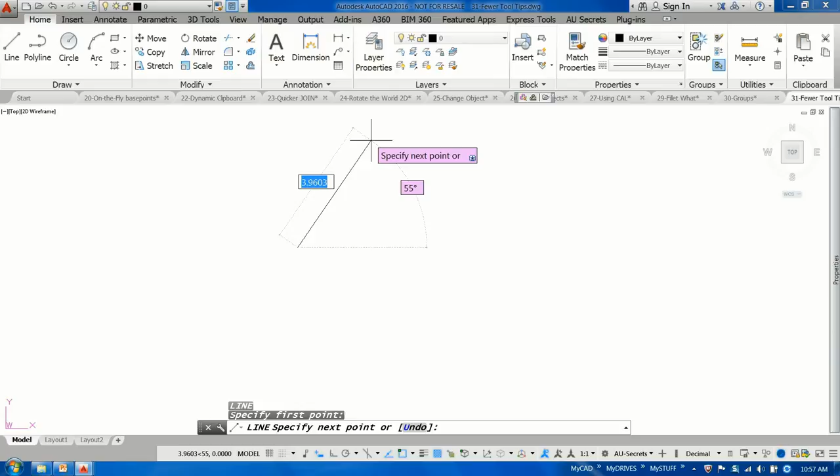Okay. Who uses dynamic input? Anybody? Okay. First thing I always tell people, because most people don't like dynamic input because when they're out there drawing, they don't like all the stuff on their cursor, right? Well, the first thing I suggest is that you turn off some of the stuff, and then it's actually pretty useful. Prior to 2016, there was another setting called Tool Tip Merge that would take all the prompts and merge them into a single section that flies around. So instead of getting 2 or 3, you just get 1.

All right? It's broken in 2016. But it's still there, so we'll just have to wait till that gets fixed. Now, in dynamic here, what you really need to do is turn off the stuff you don't care about. All right? If you don't care about the pointer input, I do want dimensions, but I like to come in and change them and maybe only show one at a time. All right? Then you can do the tab key to get to the other one. So you decide how you want to work with that.

And then you can also show additional things if you need to, but it's way too much if you ask me. Then I get confused because I got all this stuff on my cursor and I want to shake the cursor and get rid of it, right? It's just too complicated. So if you trim down all of this, and I changed mine to be really huge and pink so that you guys could see it better. You wouldn't make it that big, of course. All right, and so now when you're drawing, I'm only going to see one dimension. If I hit tab, I'll go to the angle, but I only see one at a time.

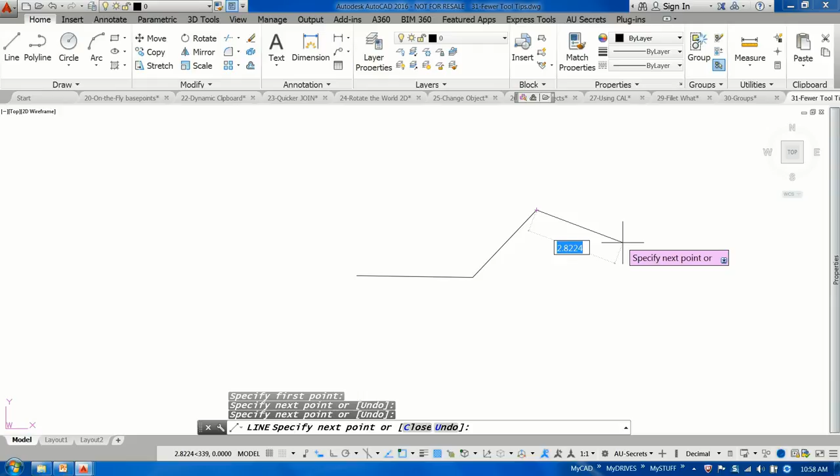Much more usable. Now, when you're doing polar, it kind of flicks around on you a little bit. See how it's flipping between endpoint and it's not even showing me the polar right now because it's not falling in correctly. It should be showing me the polar angle. At the same time, it's showing me specify next point. If tooltip merge was working correctly, it would show you the polar angle plus this prompt. It takes those and merges them together. Now what it's doing, I think, is instead of merging it like this, it's merging it like this, which isn't terribly helpful, right?

Okay, so tooltip merge. Once I did those few things, I love dynamic input. And you really should try it again because there are things showing up on dynamic input that you wouldn't necessarily see anyplace else. So check it out. Okay.

Quick access toolbars. Everybody made their own and customized it. Yes. If you haven't, oh. Okay. The quick access toolbar up here, right? It comes in with certain things that are default, kind of like the Windows standard toolbar, all right? But that's really not as functional as it can be for AutoCAD. First of all, you don't want the workspace. Who cares what workspace they're in? Really? So you don't need that up there. So turn that one off. I'm using this little down arrow here. And add the layer list.

Don't you use the layer list way more than changing your workspace? Yes. And I think the workspace is still the default up there when you're in 2016. But you'll look here, you don't have layers in this list. So anything that you want to add up here, all you have to do is right-click on top of it and add it to your Quick Access toolbar. And it is not smart enough not to add it twice. All right? So I'm just warning you. So here, I'm going to get in a file that has more layers in it. Oh, is that one already open? I got to have a file here that has, there we go. All right? So you'll have all your layers.

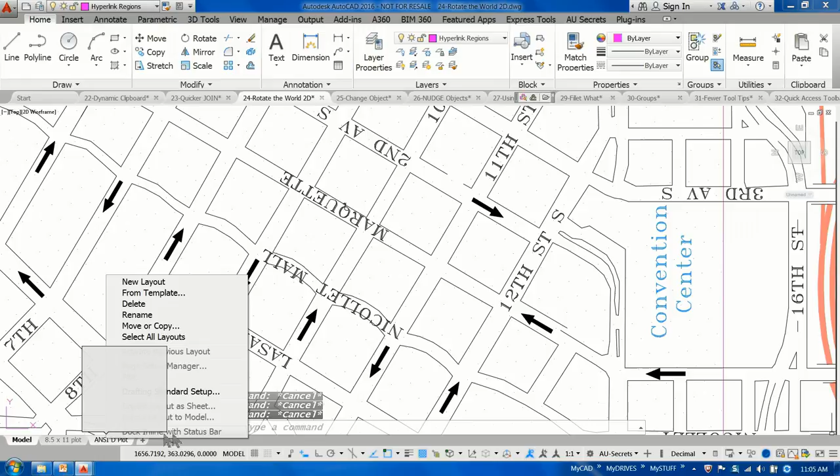Some of the good news is that you can right-click here and say dock in line with status bar for your layouts. This is all wasted gray space. Do you agree? So I can actually turn this on, but because I have my coordinates on, there's a problem with how this works with coordinates, because coordinates is always growing and shrinking. So if coordinates gets long enough that it has to push your layouts up, you're going to see this thing moving, and it'll make that sound too.

No, it won't. So what I found is if you turn off your coordinates, if you're not using them anyway, then you can have the layouts down here in the same line as your status bar, because of the dock in line with status bar. If you dock above the status bar, it will completely ignore that. But the only field in your status bar that really changes size is your coordinates. And because that has to shrink and grow, it will sometimes force this to start moving around on you. You never like anything that flickers in the corner of your eye, right? So you have to decide how you like to do that.

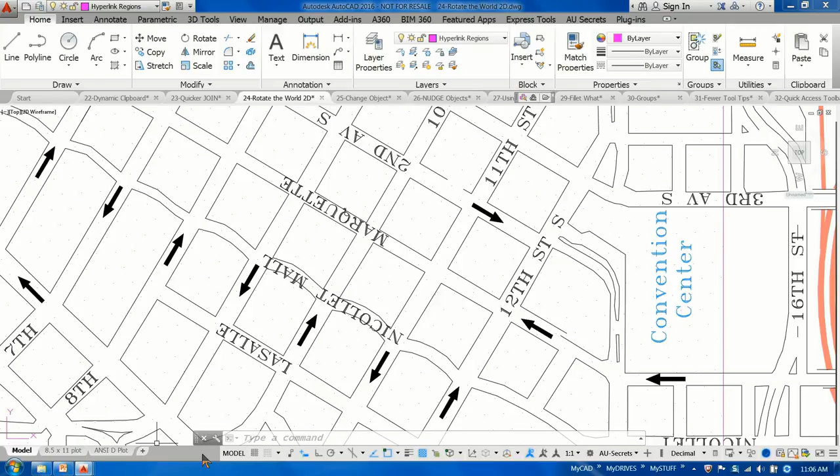Unless I'm doing civil, be honest, architects, we don't care what the coordinate is, right? That's the civil, that's your job. I don't care where my building is. That's your job. I just care where the walls are to each other.

Okay. Another one that is not used very often that I think is a shame is quick properties. Who uses quick properties? Not nearly enough of you. So I thought, what can I use in quick properties that I can't really do any other way easily? I had a question with tolerance dimensions. I was working at a manufacturing company, and they were saying how difficult it was for them to come over to properties and find all the tolerancing stuff, because it's all the way at the bottom, right?

So all that scrolling, when that's how they're changing it all the time, is really tedious. So we go ahead and turn on quick properties, and then I'll select this. By default, it's not going to be in there, all right? What you need to do is you need to tweak your quick properties on a per object type basis. So I want to tweak how a tolerance dimension, what fields does quick properties show me?

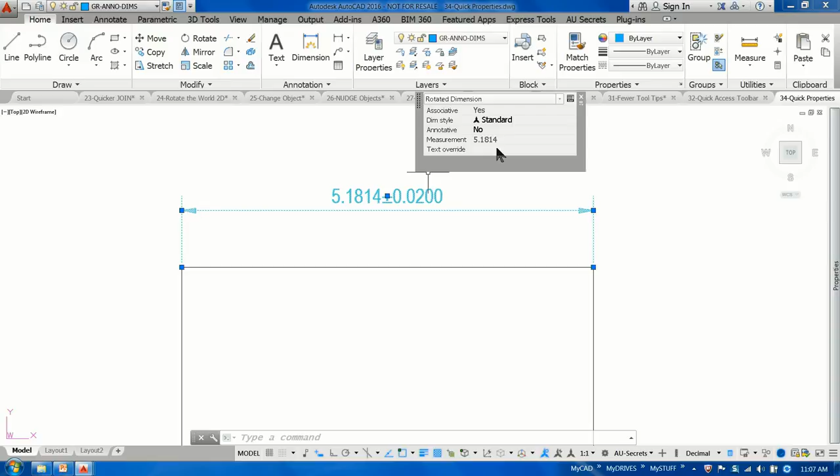So if I right-click down here and I go to Customize, takes it a minute to load. Here is my rotated dimension. If I come all the way down here, I can say, okay, I want to get some of this. I want the alignment, I'll do limit upper, lower, and precision. All right, I'm going to turn those three things on because those are the things I change the most. I'll hit apply and OK.

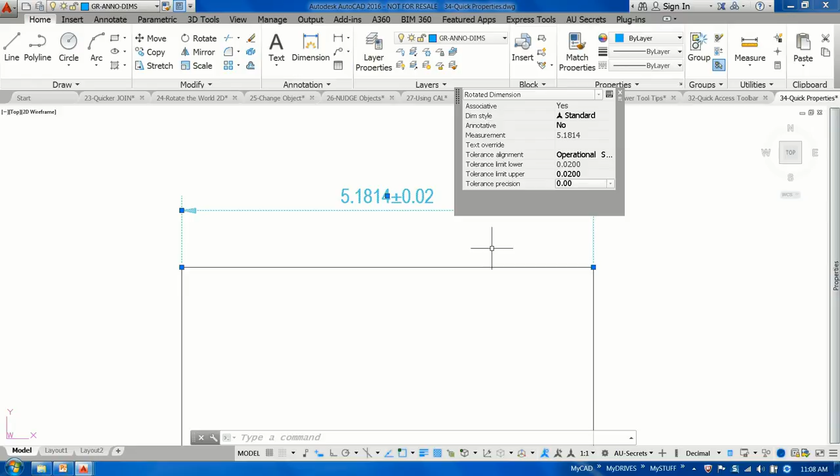Now when I select this tolerance dimension, I can come in here and I can change this to be anything that I want. Oops, I didn't want to hit that button. I can change the type. Oh, I didn't put the type in there because you can change it from symmetrical to, what's the other type? I'm not a mechanical guy, but all right, so you can come in here now and you can actually change that. So let's change it to 0.01. And then I can go ahead and change the precision to 2. Easier?

It does work with vertical products. I don't know for sure what properties are in all the vertical products, but quick properties is there if it's AutoCAD based. Yep. Now, when you tweak this, when I first come in here, it doesn't list all your object types. If you right-click, you can edit the object type list.

Oh, don't crash. Should come up with my list. Come on. Okay, I'm not sure why that's not coming in. It should list all like line, dimension, circle, polyline, arc. It'll list all those object types. And let's see if I hit this button, if it'll let me do it. Oh, you hate that blue spinny thing, don't you? You just pick the object types you want in this list, and then you can tweak those object types' quick properties. All right? I'm afraid, it's scaring me because it's just spinning blue and not coming up.

Okay. I kind of already showed you this one, your multi-document interface management now. Because you have the tabs now, which is a great thing, isn't it? Don't you love all the file tabs? Yes. If you come in here, you now have open file location. I used to have to make a button to do this so that it would actually open up that location in my Windows Explorer so that I could look for another project file. You can also, because I have more than one project file open typically, unless you're lucky and you only have to work on one project at a time, which that doesn't usually happen either.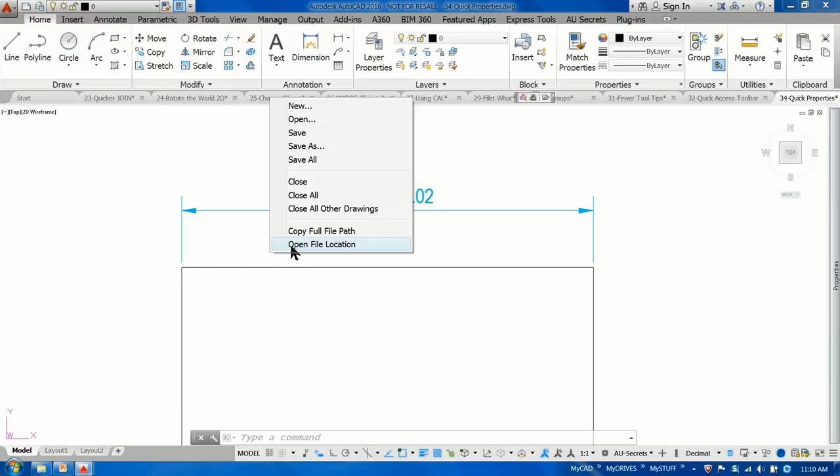But now you can right-click and you've got all these extra multi-document interface commands that are handy right there on the right-click menu. And what does the asterisk mean? It's changed but not saved, all right? And of course, you can close it by hitting the X. Those are, I think, some of the obvious ones. I didn't need to point those out. You can rearrange them by dragging and dropping them. That can be handy. Same with your layout tabs, right? You can drag and drop your layout tabs.

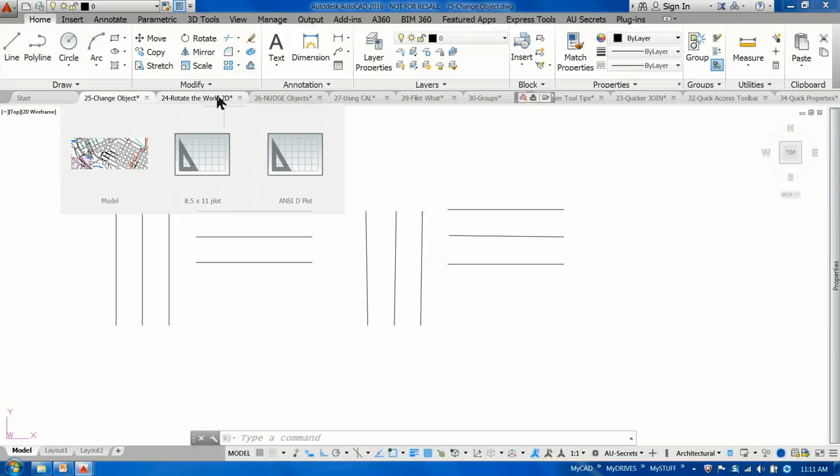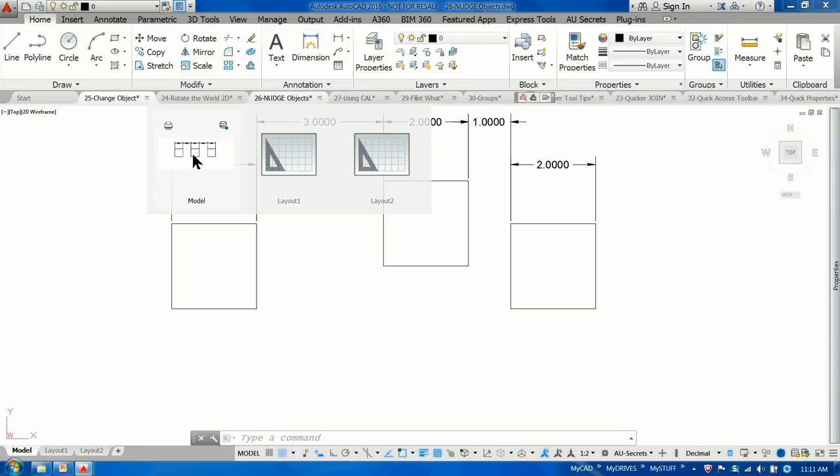One thing that you can do if you hover here is you get the pictures, right? Depending on the quality of your video card, this actually might be a performance hit. It might be too slow, because we never like anything that takes longer than 1/100th of a second, right? So if these are too slow, if you don't like that, you can turn those off. Also, if you don't like the fact that it switches your file, see how when I do my thumb hover, it changes my display so that I can see it big in the background. If you've got really big files, this might not be the greatest enhancement for you.

In the handout, I gave you some configuration variables that you can change so that your thumbnail hover won't switch the background. It'll just let you hover and you'll see the hover picture, not the background view change. You can turn off the display of those completely if you don't like the File tab. So if you do like File tab, see there's File tab preview. If I turn that off and you hover, it's just, oh, come on. I might have to exit and come back in. But there's 3 or 4 settings where you can change how your File tabs work. There's also a way, I'm sorry, I don't like the Start tab.

I don't like it. I've tried it, it just irritates me. So if you do the start up, or start mode, turn it off, the Start tab goes away. Yay! Not everything new is good. Sometimes it takes years for me to like something new.

There's a bunch of shortcuts in there for the Control key and Shift key. I'll let you read through those because they're just typical things, like how do you cycle between overlapping objects? Shift space, right? Or depending on your version, Shift tab. The Control key, I've already covered many of them. You use it to get to sub-objects, to get to faces, faces behind another face. But I documented all of the Control and Shift shortcuts in the handout. You guys can read that when you get home.

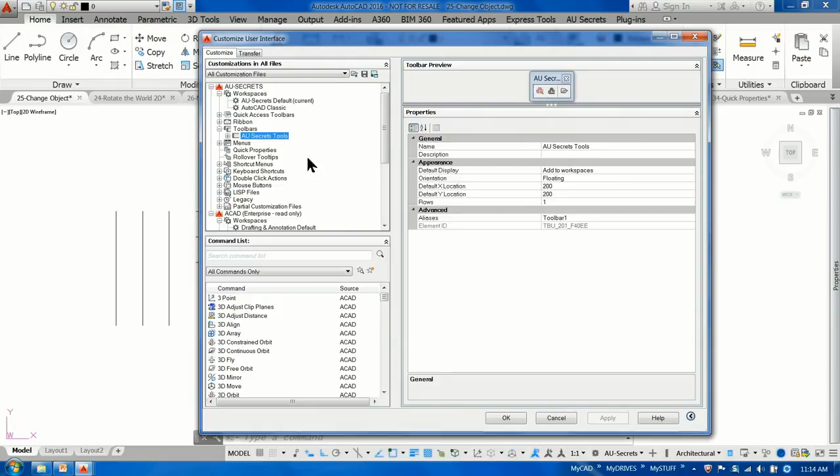Not manually, heavens no. If you look in here at your CUI and you find your toolbar, if you right-click, you can convert it to a panel, just like that. Yes. And then once you have your panel, you make your ribbon tab and you drag and drop it and put it on your ribbon. So here you'll see that I've converted mine to my AU secrets, and there are my 2 buttons. It's just a right click.

Now number 38 in your handout is a little more complicated, so I'm going to show you a couple of them. I call it your CUI magic. Okay, here I have 2 lines.

Everybody does double-click editing, agreed? Well, what does double-click editing on a line do? Does yours change it to a polyline? If you put this on your double-click editing, you can double-click edit a line and it'll convert it to a polyline automatically without you having to do anything. So no longer do you have to do p-edit and change it.

And first of all, it's a further tip: when you run p-edit and you select this, it asks you that nasty question, doesn't it? This is not a polyline, would you like to turn it into one? Who has ever said no? Have you ever said no? I would assume if you weren't trying to convert it to a polyline, you didn't run p-edit.

So first of all, this one is p-edit accept. I have mine turned off, and if I run p-edit, it's not asking, I don't know why it's not asking. Oh, maybe my command line's too small. But change your p-edit accept to 1 and it will never, ever ask you that question again. That's the first thing.

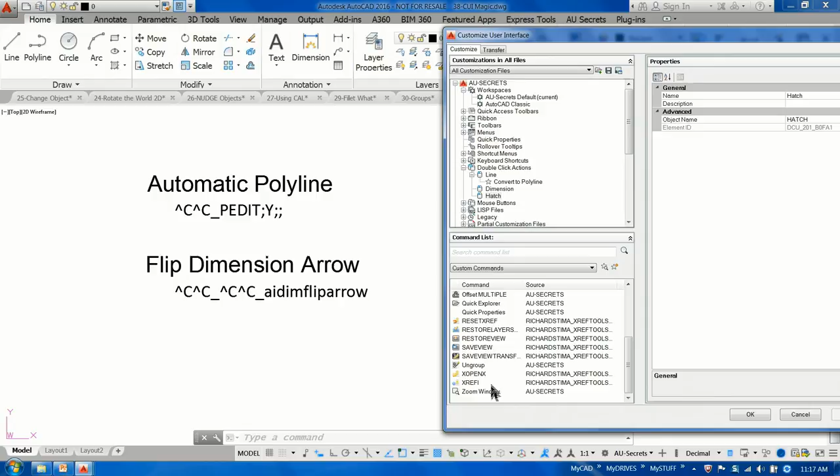So here's the key in. Now I take this command, and I drag it up and I put it in my dimension.

Now, if you have a custom CUI and you're not working in ACAD.CUI, which hopefully nobody is editing, hopefully you all have your own, and you have partially loaded your ACAD.CUI. If you're confused on how to do this, look online.

There's classes on how to correctly use your CUI files. If you come down here to the AutoCAD one, which I have attached as read-only, and look at double-click menus, you just have to find the object type. So what object do you want to change its double-click behavior? You find the one that you want. See, right now it's doing text edit.

That's why when I double-click on a dimension, it does the text editing. Well, now I'm overriding that. Remember, only one double-click action per object type. I did this one on purpose so I could show you how I'm going to disable text editing.

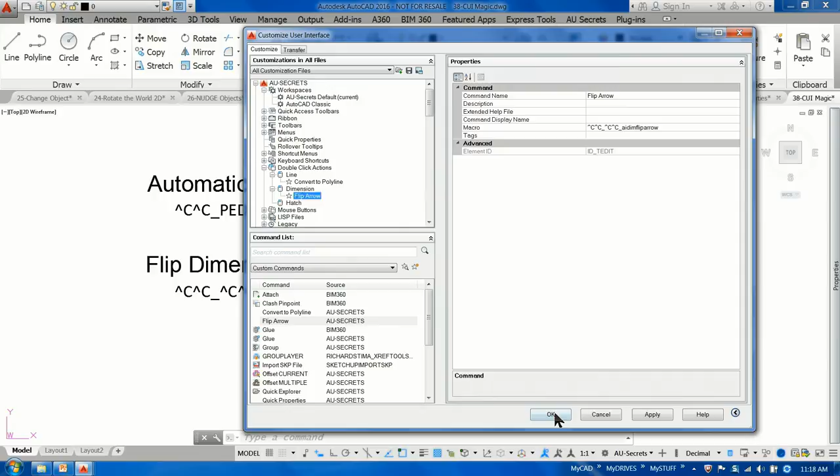So some changes can be bad when you realize what you've done. But if I do the flip arrow and pick OK, we'll go ahead and put a dimension. Oops, I should use a new one.

Ooh, I need my dim scale to be a little bit bigger, don't I? Let's make it 4. It's still too small, I'll zoom in. So now when I double click on this, it flips the arrow.

But what did that just disable? I can't edit my text now with a double click. So watch out for that. Just because you want to change a double click, it's not like I can have a dimension double click 2 or 3 different ways. Of course, I'd love it if they would let me do that.

Like if I double click on the arrow, it flips it. If I double click on the text, it edits it. Wouldn't that be cool? Yeah, change request.

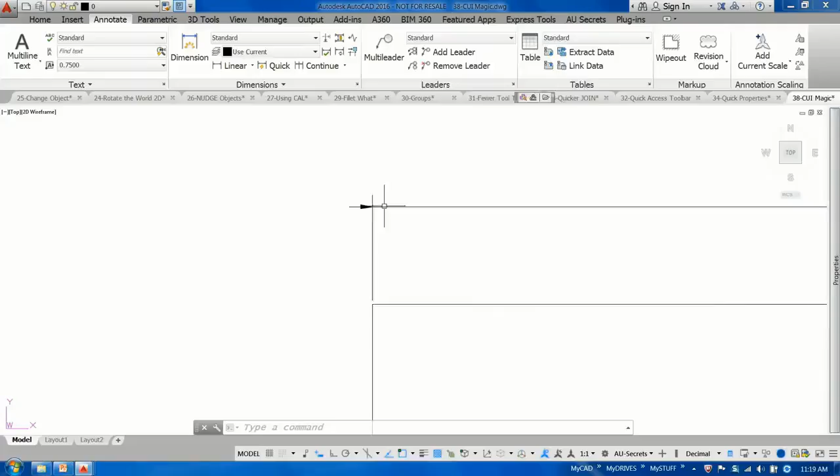There's more than these 2 in the handout. You can, but I wanted to show you purposely how you can break the default double-click action.

But you're absolutely right, I don't want my quick properties. If you hover and right-click, or actually you just hover if you're using dynamic input, yes, you can flip it there too. But this isn't the only time you're going to try to put a double-click action on something and then realize you just disabled something else that's more important, right?

I got about four different kinds of double-click CUI magic stuff in the handout, so you can look at those.

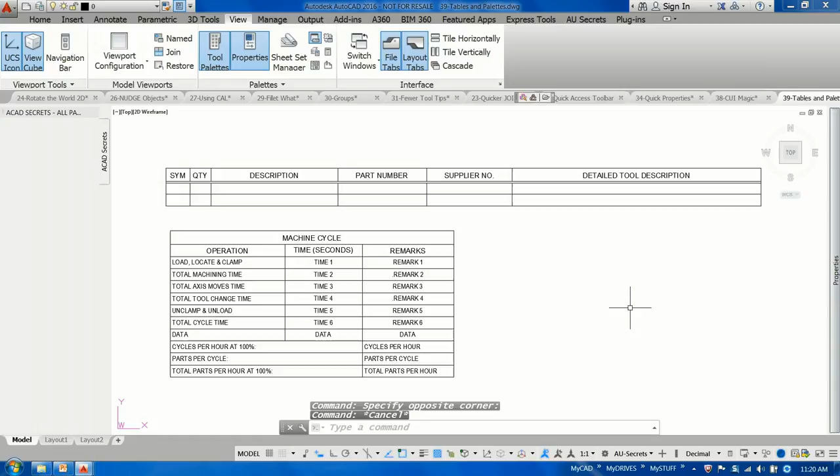Here's a good one. Everybody's using tables, I hope. Yes? You're using smart tables? Of course you are. Okay, here's my table. I've made this specific table that I want to use as a standard table in my drawings. So I've set up the table style and I've got everything working. Now, how do you put the table over here on your tool palette?

You can grab it and try to drag it, but what happens? It's hard to grab, isn't it? Here's the trick. Select your table, drag it with your right mouse button, not your left. So right-click drag and drop it on your tool palette. I don't know why it works, but it works.

Now, when you go to place this table, it's not quite what I wanted. See how it loses the text? And you have to put that back in.

So we would have standard tables that people would go in and fill out, but I didn't want the users to have to fill out all the titles, and the only thing that changed was the times and remark settings. All the rest was the same for every single table when they were doing this machine cycling table. So I turned it into a block.

If I turn it into a block and left-click and drag it, because we can left-click and drag blocks, and I put that on my tool palette, then under Properties I want to come in here and say, as soon as you place it, explode it so that it's a table. Now, when I select it off my tool palette and drop it, it will remember everything.

That's how you set up standard tables with things filled out ahead of time. So make them all up ahead of time, put them on a tool palette. Make them a block, explode them on import.

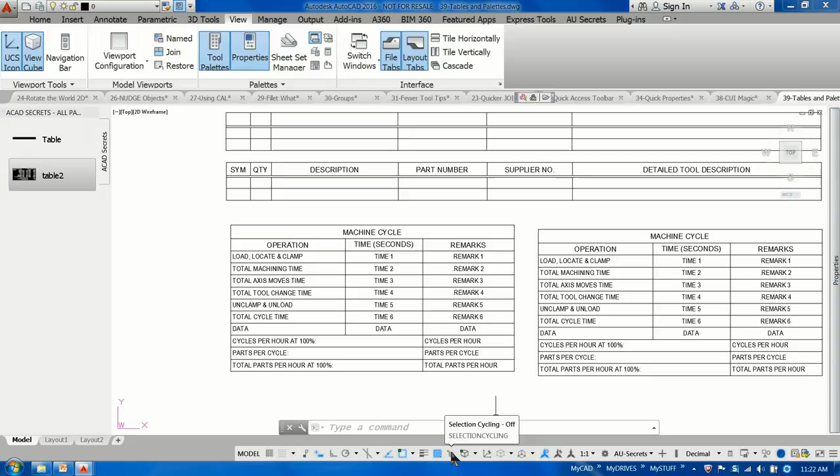We talked about selection cycling already. You use shift space bar to cycle. Are you guys using your selection cycling? No? Please say you are.

I got lots of overlapping stuff here, don't I? Yes, I can do shift space, space, space, space, space. I'm holding down the shift key and just toggling my space bar. You've also got your selection cycling, which I like even better.

Now I can just pick, and it tells me everything that's at that location, and I just hover until I get the one I want and select it from this little pop-up dialog, right? And that's the new selection cycling down here, which nobody seems to be using.

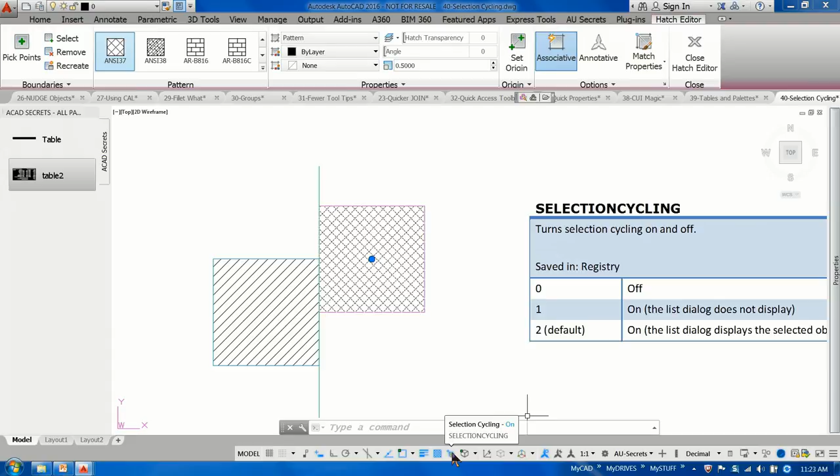Here's an oldie but a goodie. You have two viewports and don't know what angle they're rotated. Yes, you can look at properties, but here's an oldie but goodie: View Twist. It's still there, and it tells you what the angle of the viewport is. Put it on a button, click in the viewport, and it'll tell you without you having to do anything else at all.

Okay, one of the new ones that I absolutely love - does everybody use Rev Clouds? How do you like the Rev Clouds in 16? Aren't they awesome? They're smart now.

So now let's look what we can do with this. If I do Rev Cloud, it works pretty much the same way as you would always do - rectangular, polygonal, freehand, whatever you want to do. So that really hasn't changed that much. What has changed is if I run Rev Cloud, there's a new option called Modify.

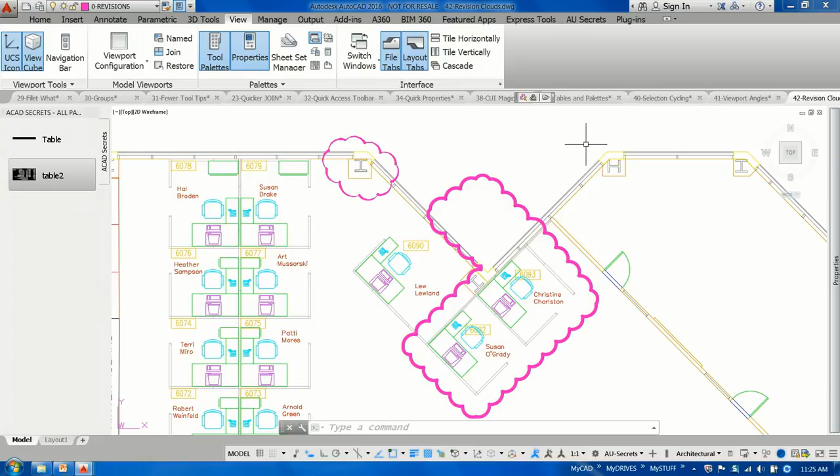Uh-oh, we must be getting close. We are. Okay, I had a few here I didn't get to, but a lot of the ones at the ends are system variables. I'll do one more because it's one of my favorites: Generate a 3D solid. I have like 5 or 6 3D ones at the end of the handout. So if you come in here, here is my solid.

So let's say you have an old 2D drawing. You can run Flatshot and get all the flat views of it. If I run Flatshot, it lets you create the 3 flat views if you already have a model. But if you have a 2D drawing with all the flat drawings, what you want to do is use your 3D rotate and rotate your 2D polylines.

I made mine a polyline because it's just the outside shapes. Rotate them into position, like I've done here, with 3D rotate. And then what you want to do is go to my 3D tools here, and I'm just going to do Presspull.

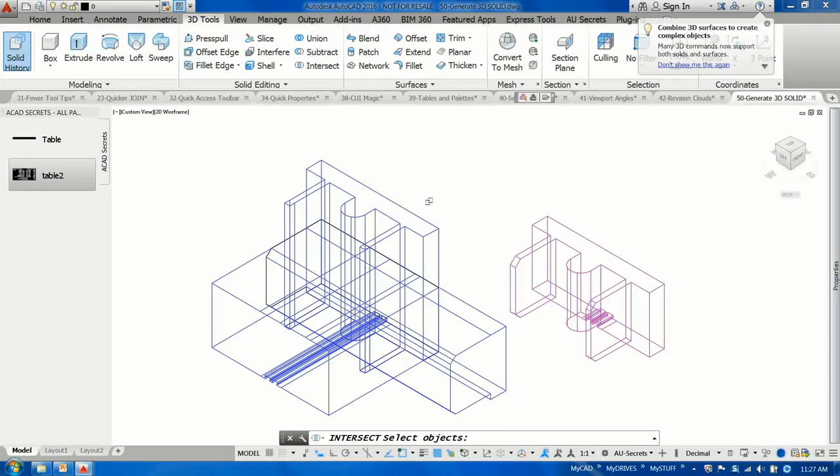I'm going to select this and pull this one up here. I'll pick this one and pull this one here. And then I'll take the bottom one and go up - so I'm basically stretching it into itself. Then what do I want to do? Intersect - just keep the parts where they intersect. Done.

Get rid of your polylines - you just converted your flat drawing into a 3D solid. Cool? Now, it doesn't always work on everything. If you have holes in the middle and stuff like that, you have to be a little careful how you're doing the intersect. But you can do intersect part of it and then intersect the third part, or union them together.